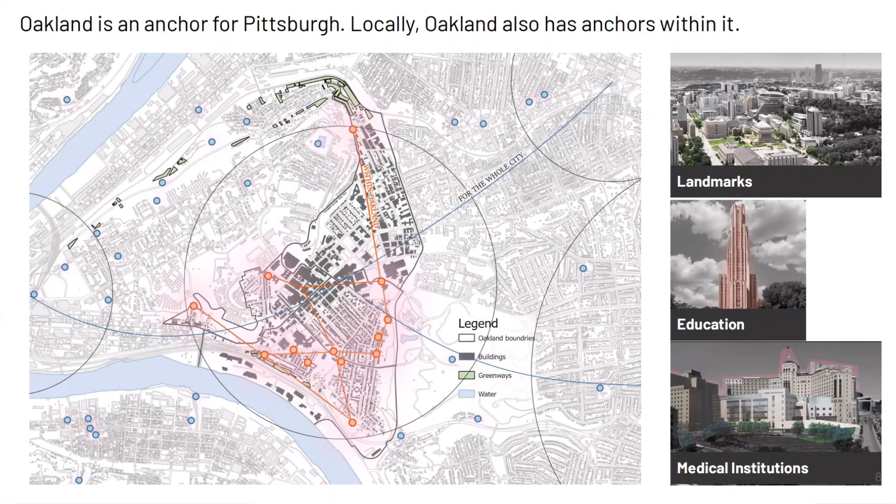Oakland is located at a pivotal point where the street system shifts course. Oakland's major streets follow historic trade routes. Forbes Avenue historically was used by the Delaware and Lenape tribes to travel to and from the East Coast. It was along the same corridor that the first highway was established by the British, which today has become an interstate highway.

Pittsburgh's landscape consists of terraces eroded over millions of years from the ancient Allegheny Plateau. Oakland's geography gave rise to a pattern of land use that is part of its identity. It is a flat plain with a strong geographical boundary formed by steep wooded slopes all around, and a low-lying floodplain along the Monongahela River to the south. While heavy industry and railroad lines dominated Oakland's floodplain, worker housing, churches, schools, and businesses occupied the terraces above.

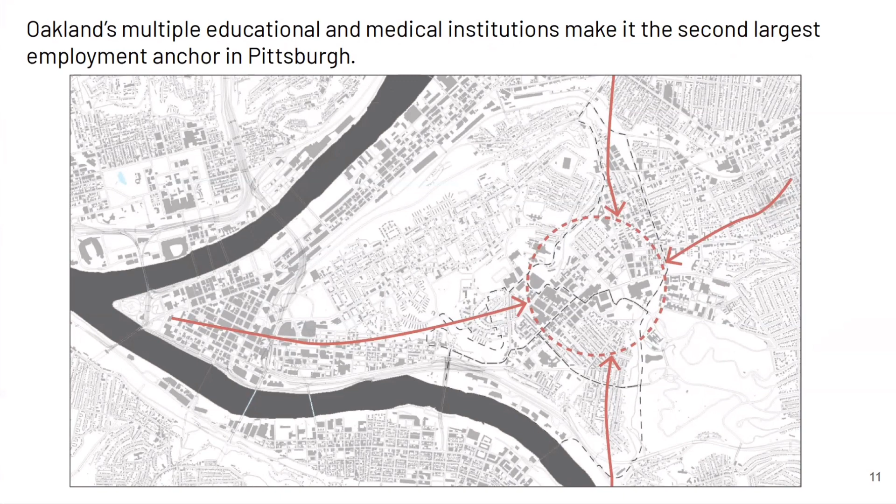With 350 businesses, over 23,000 employees, and a 3:1 employee-to-resident ratio, Oakland is the second largest employment anchor in the city. Oakland's entertainment venues and cultural events draw people from within and outside the neighborhood.

Using Kevin Lynch's mapping technique, Oakland's landmarks, nodes, paths, edges and districts are identified and located in the neighborhood's spatial structure. Oakland's spatial map shows how the 5th and Forbes corridor divides the largely residential area to the south from the denser institutional and commercial zone to the north. Arterial streets, shifting block grids, institutional zones, and slopes all divide Oakland into distinctly different districts.

What makes Oakland diverse? Compared to most neighborhoods, Oakland has a great mix of land uses, housing types, and building sizes.

Longtime residents of Oakland have different interests than institutional administrators or business owners. For these reasons, Oakland is a contested neighborhood. Institutional expansion, large-scale high-density residential projects, and the impact of cars and parking all lead to challenging planning issues.

A study of Oakland's urban grain reveals a clear distinction between the residential and institutional fabric. North Oakland and Central and South Oakland are the major residential areas, though very different in their building fabric. They are split by the commercial corridor and institutional campuses.

Central and South Oakland have a small-scale pattern of streets and blocks, contrasting with the heavily trafficked city arteries, the 5th Forbes corridor and the Boulevard of the Allies. Large-scale institutional development has transformed the finer-grained pedestrian-scaled street grid into large blocks of parking garages and concrete walls.

Serviced once by an extensive streetcar system, Oakland today is accessed primarily by cars. The public bus system is limited to major through streets, and walkability studies reveal a lack of last-mile connectivity in the neighborhood's residential areas.

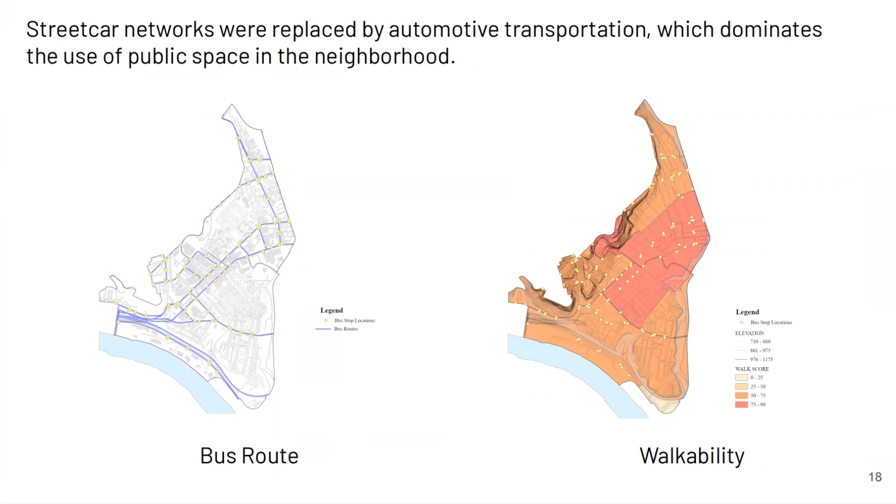Oakland is a complex neighborhood. The boundaries of North, Central, South, and West Oakland, although commonly used, are not as well defined as they initially appear. They are confused by different city council districts, census tracts, business and community organizations, and historical patterns of settlement. This porosity may mean that the community service hubs might be more than local service centers, particularly if they can be networked into a larger system.

Oakland as a neighborhood reinvented itself over time. In each era of Oakland's history, new economic drivers and accompanying waves of immigration have reinvented its socio-cultural fabric and urban infrastructure.

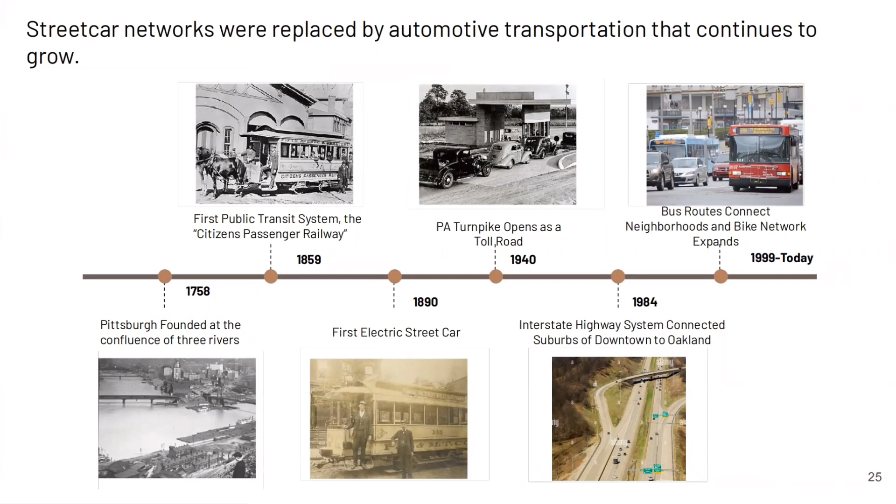The City Beautiful movement that swept across North America in the early 20th century as a reaction to the damages of industrialism was envisioned to reinvent Oakland's public realm into a grand monumental landscape. At this time, the University of Pittsburgh was redefining itself on a 43-acre consolidated campus in Oakland. While the steel industry was declining, the university and hospitals became Oakland's major employers. Today, the neighborhood hosts many spin-off organizations stemming from these institutions.

What does this story tell us about Oakland? Assessing the neighborhood's strengths, we see that it is an economic hub for employment. Its service economy is dominated by its eds and meds institutions, which, like any monoculture, lacks long-term resilience. The neighborhood needs to diversify its economy through bottom-up transformation. The low rate of owner occupancy, which has been falling further in recent years, means there is a weaker base of long-term residents. Continued privatization of public space by large institutions reduces the vitality of the neighborhood's public realm.

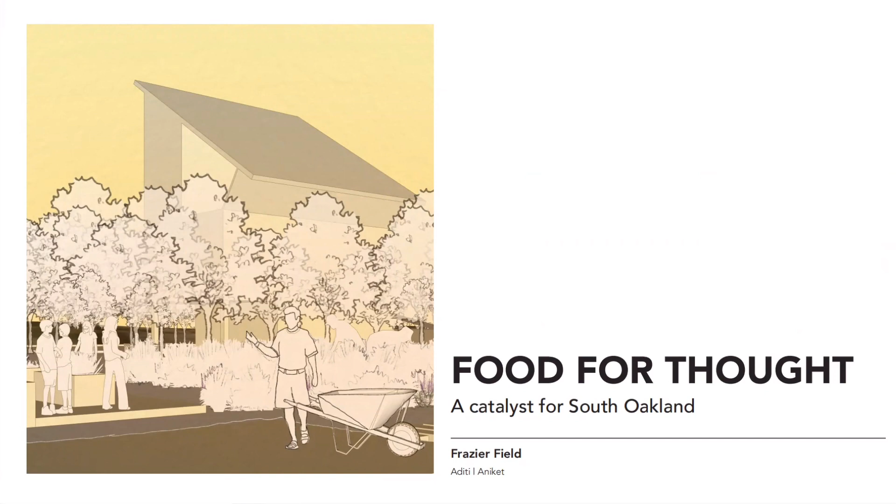Yash and Kaushik have transformed the Herron Hill Pumping Station in North Oakland into a community service hub that is the nucleus of a network of large public spaces. It celebrates Pittsburgh's water infrastructure and history and transforms underused land into economic and cultural opportunities for an increasingly diverse population.

Seyang and Shreya have created Zulema Place, a new center for the Zulema Park District that envisions a mixed-use development around the park with a community service hub that facilitates employment and entrepreneurship.

Rutuja and Yihan propose a multi-site community service hub in central Oakland, expanding the functions of OPDC to advance formal and informal learning in the neighborhood.

Xinyue and Fangyu offer a redevelopment of the Gulf Research Building site along the Boulevard of the Allies as a community service hub with a new mixed-use building centered around a courtyard. The hub will serve as a catalyst for development as well as stimulate investment and improve resilience in the community.

The community service hub at West Oakland at the corner, already a center for food in the neighborhood, is intended to become a part of the neighborhood-wide resource sharing network.

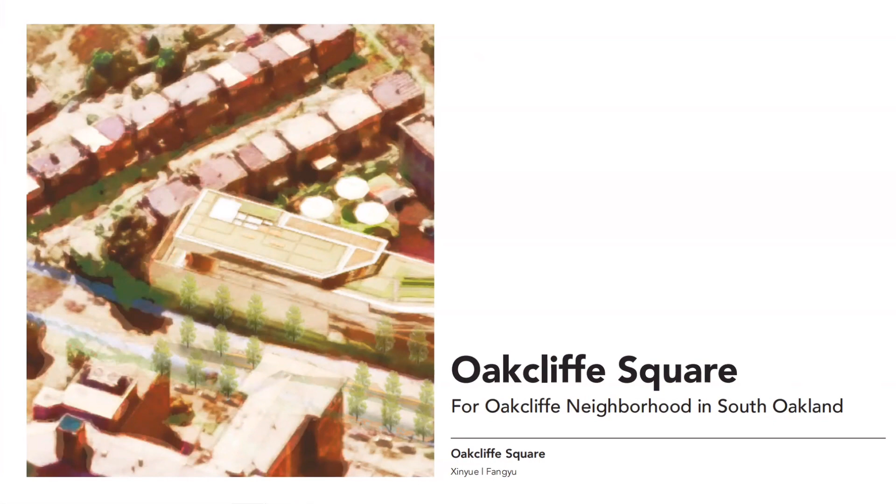On behalf of our team, Aniket and myself will be presenting our proposal for a community service hub at Frazier Field. Food for thought, a catalyst for South Oakland.

Frazier Field, also known as Dan Marino Field, named after the South Oakland resident who became a renowned NFL football quarterback, is the only large open space in the neighborhood. Located along Frazier Street at the southern edge of the neighborhood, it is bounded on other sides by the steep hillside slopes of Panther Hollow and the Monongahela River.

Frazier Field currently hosts a front office field house, baseball court, basketball court, and kids' play area. The courts and play area bring in children after school hours, as well as college students. South Oakland Neighborhood Group, or SONG, hosts their weekly meetings at the field house.

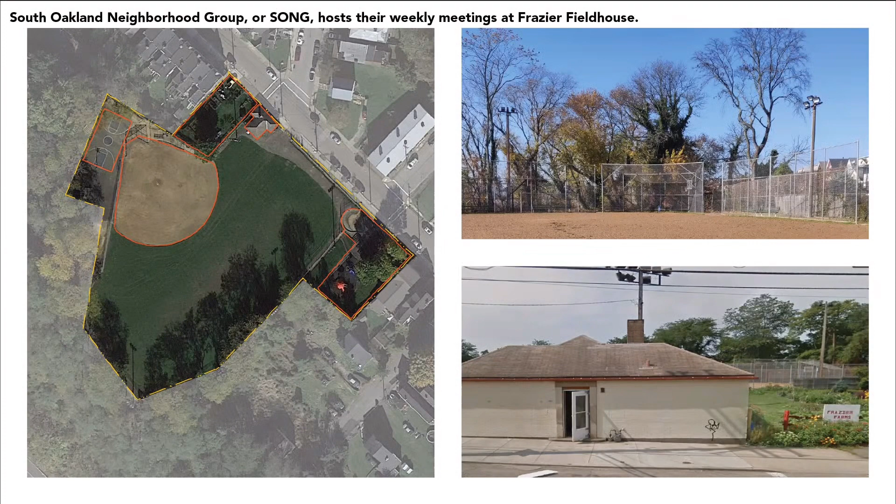We assessed South Oakland's current strengths, weaknesses, opportunities, and threats. The strengths are: the neighborhood has a dense residential fabric with unique affordable housing, on-street parking, and one-way managed traffic. Historically home to mill workers, it continues to host immigrant families and their communities. There is the availability of large open space such as Frazier Field in the neighborhood, along with access to Schenley Park within walking distance. The forested hillside wrapping around the southern edge and a few parklets in the neighborhood add to its appeal.

There are community serving organizations operating in the neighborhood such as SONG, OPDC, Oakcliffe, and CSHs. The Boulevard of Allies divides South Oakland from the rest of the Oakland, but it also protects the neighborhood from Oakland's more developed areas, making it more private.

The weaknesses are: 77% of the existing real estate is absentee owned. Only 23% of the neighborhood properties are owner occupied, compared to the city average of 46.7%. There is a lack of last mile connectivity to access the public transportation system on the Boulevard of Allies, where only 3 buses—58, 65, and 93—run, and at a sparse frequency of 45 to 60 minutes.

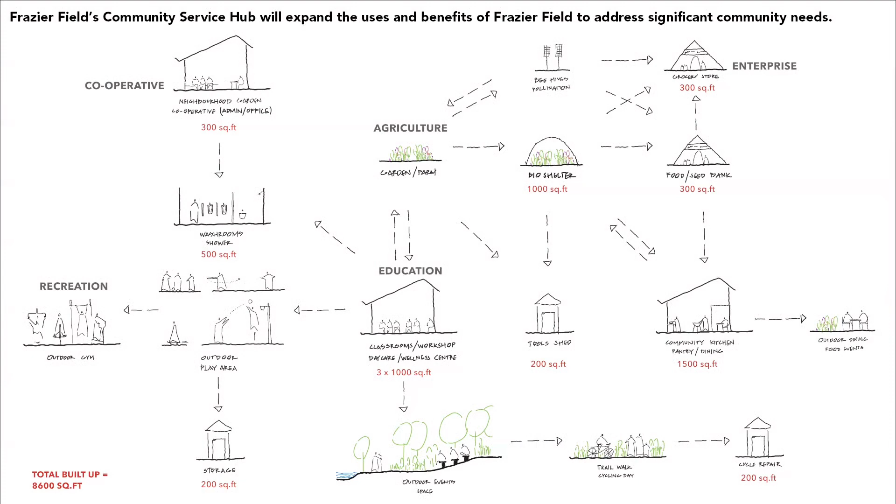The operational model for this community service hub charts out the sources for raw material, funding, labor, and income through local and global partnerships. The key, we believe, is to build on South Oakland Neighborhood Group's existing board as an umbrella organization that encourages and manages 3 kinds of neighborhood cooperatives under its leadership: South Oakland Neighborhood Food Cooperative, South Oakland Neighborhood Housing Cooperative, and the South Oakland Neighborhood Mutual Aid Cooperative.

These cooperatives will allow the community to build collective wealth, knowledge, and resources, and ensure investments remain local within the neighborhood. It will build voice, advocacy, and aid co-action during adverse conditions.

As part of our proposals for the Community Service Hub, we have envisioned a 20-year model of change and visualized that phase-wise projection in 2, 5, 10, and 20 years from now through a monthly newsletter publication, Sing Along with Song. In this stage, we see the residents of South Oakland coming together through multiple events hosted at Frazier Field by the Song Group, such as basketball tournaments, pet meets, book clubs, and movie screenings.

These events lay an impetus for discussions on the needs of the neighborhood and mobilize co-action to begin talks with the city, universities, and organizations on these goals in a 2-year period.

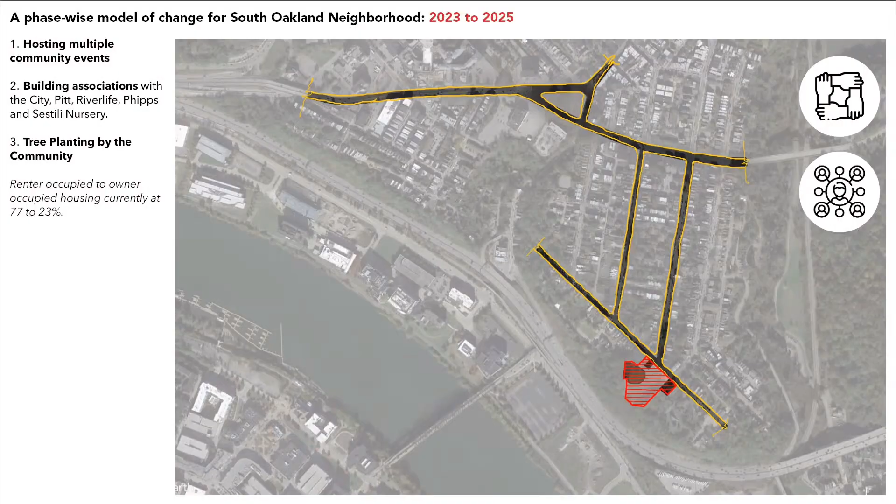In the next phase, we see that the community has grown closer. Residents and students engage actively in the neighborhood's pursuits. The existing Song Board brings on new members in alignment with the neighborhood goals and leads the way. Quality of the neighborhood's public realm is enhanced, beginning with reconstruction of the Boulevard of the Allies and neighborhood streets. Last mile connectivity is addressed with the city, bringing in shared mobility.

In the second phase between 2025 and 2028, the Song Board brings on new members into a third of its team to help start cooperatives. The South Oakland Neighborhood Housing Cooperative is formulated as a subsidiary of Song. Negotiations begin in the neighborhood with 250 absentee owners to acquire housing.

Hillside slope remediation begins with multiple rounds of manual de-weeding and native seed dispersal with the city and community volunteers. Formation of a public pathway at the hillside edge begins. Boulevard of the Allies is reconstructed. Designated parking is introduced to South Oakland streets. The city also brings in shared mobility with a neighborhood shuttle running on a Dawson Ward loop and cycle sharing stands with POGOH. Crowdsourced funding to set up Frazier Farm begins.

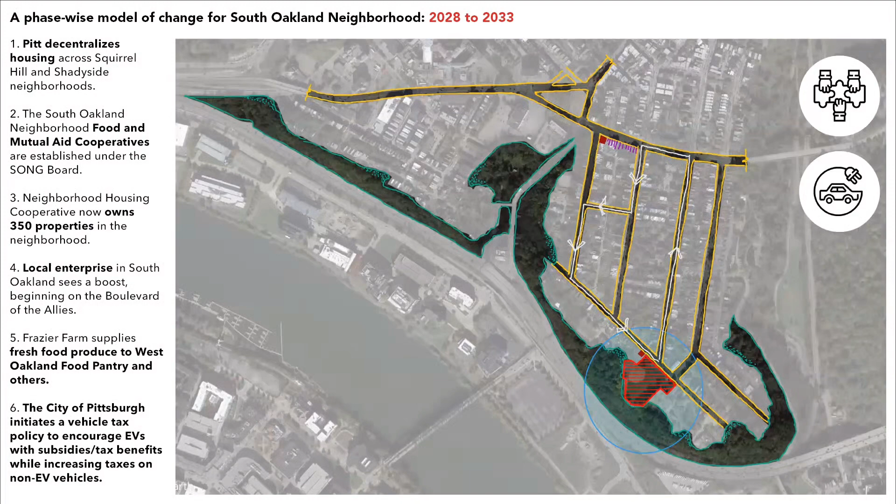Charging stations introduced to South Oakland streets. The city of Pittsburgh initiates a vehicle tax policy at this stage to encourage EVs with subsidies and tax benefits, while increasing taxes on non-EV vehicles.

In the final stage, we see South Oakland as a thriving neighborhood with a strong sense of community and local economy through its 3 cooperatives. The public realm has drastically improved with more pedestrian and environment-friendly interventions.

In the final phase, between 2033 and 2043, food production at Frazier Field is maximized. A completed hillside pedestrian trail gets connected with the river Esplanade through the Bates Steps and is integrated with parks and parklets. Mobility in the neighborhood encourages an increase in the number of non-car commuters, with residents adopting walking, cycling, and taking the bus or the shuttle.

Neighborhood cooperatives continue to grow and acquire more housing, strengthen community food networks, and mutual responsibility. Through cooperative building over the years, home ownership is made accessible and affordable to those in need, and a higher than average ownership occupancy can be seen at this stage. Rented occupied to owner occupied housing is at 35 to 65%, which is remarkable relative to the city.

For our proposal of the Boulevard of the Allies, the right-of-way is reorganized to accommodate a wide green median in between left turn lanes, introduce a curb landscape, and further a raised unidirectional cycle track and footpath on both sides, separated by flexible bollards. In due course of time, shade from the tree canopies will cover its entire length.

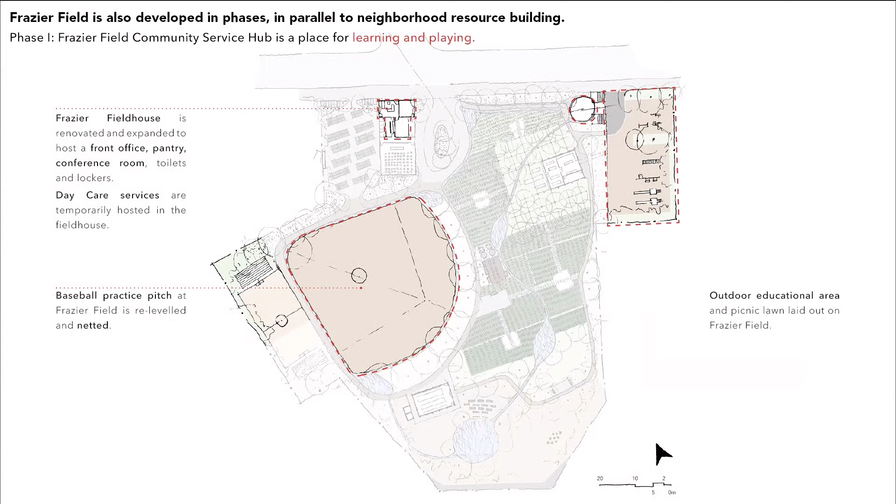In the next 3 years, kids' play area is relocated so that play and gym equipment for adults can be introduced. Basketball court is relocated and doubles up as a futsal court with seating on 2 sides. Bioremediation of soil patch-wise begins. Independent raised beds are developed. Composting begins on site.

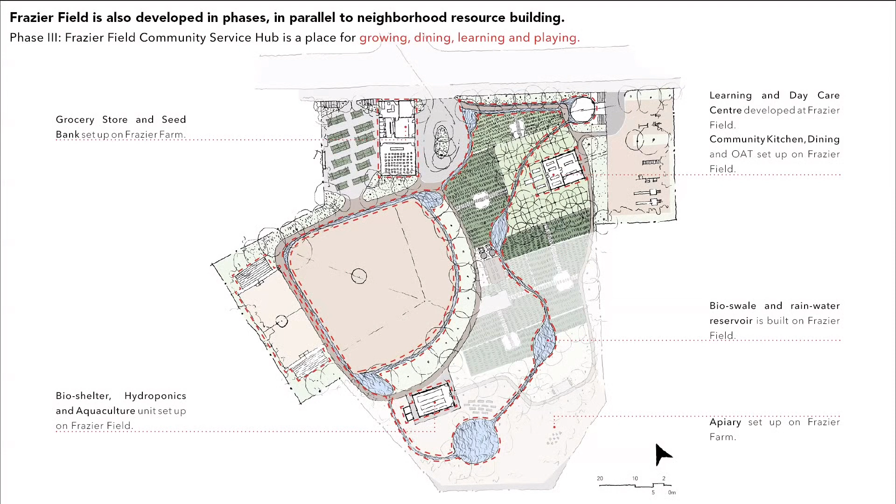In the next 5 years, bioswale and rainwater reservoir is built. Learning and daycare center developed along with community kitchen, dining, and open-air theater. Bioshelter, hydroponics, and aquaculture are set up alongside a grocery store, seed bank, and apiary.

In 20 years, Frazier Field Community Service Hub is fully operational in the service area and beyond.

The design proposal for the site accommodates all of the productive farmland, bioshelter, and buildings with solar roofs oriented along the north-south direction. A bioswale and a series of small rainwater harvesting ponds run along the site contours down to culminate at the hillside edge in a reservoir.

The expanded field house gives way to the baseball practice pitch with the futsal basketball courts at the back. An area next to the field house hosts raised beds rented by the community residents. A vehicular entrance is provided for loading and unloading of goods.

The learning center sits in a clearing of the fruit orchard with a partially outdoor dining, kids' play area, and adult outdoor gym on the site. Platforms to pause and store goods or equipment temporarily in the farm meet at a central demonstration deck and composting unit. The apiary sits in a secluded area to protectively raise queen bees.

A picnic area, open-air theatre, and a peripheral walking pathway create a pedestrian trail connected to the hillside slope.

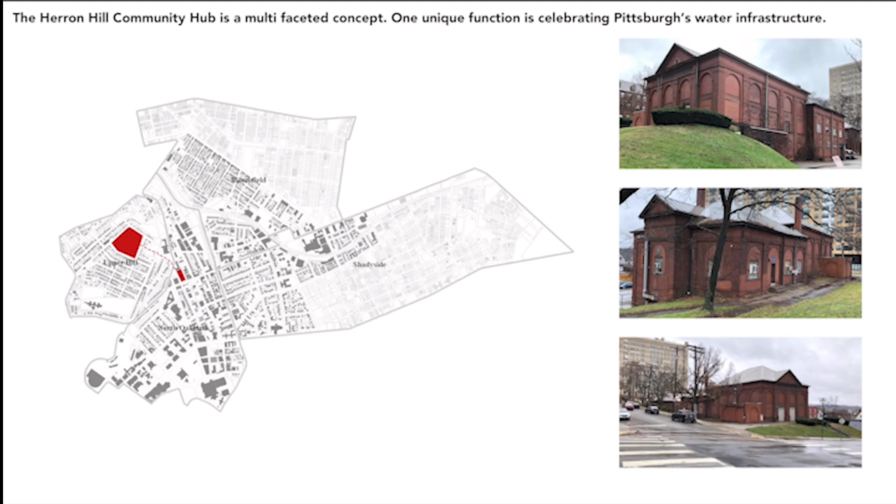The buildings on site include the main pumping station, which is still functional, and the defunct laboratory at the rear. The pumping station supplies clean water to Oakland and the neighborhoods around it. The pumping station building, built in 1896, was a technological step forward involving innovative water analysis.

Herron Hill was constructed in the late 1800s and was designed by a prominent architect, William Frazier, in the classical revival style, which incorporates Greek and Roman elements.

Both buildings have stood at the original location since their construction and continue to play a key role in the water distribution system of Pittsburgh.

The laboratory, although defunct, was crucial in advancing water and paving analysis for the city in the last 60 years. The station mainly pumped water to higher elevations such as the Hill District and Squirrel Hill.

Currently, the site is extremely contoured, underused and ignored, covered with overgrowth and almost unseen. Although it was made viable for historical landmark status, very few residents of Oakland and even fewer of Pittsburgh know about the buildings.

Due to the covering up of windows of the building and the abandonment of the lab, the site remains underused, with only the PWSA and maintenance staff visiting it from time to time.

The northern rear portion of the site is covered with overgrowth and remains a dormant space with the potential for change. Large tree canopies in this area serve as a backdrop to the structures as well.

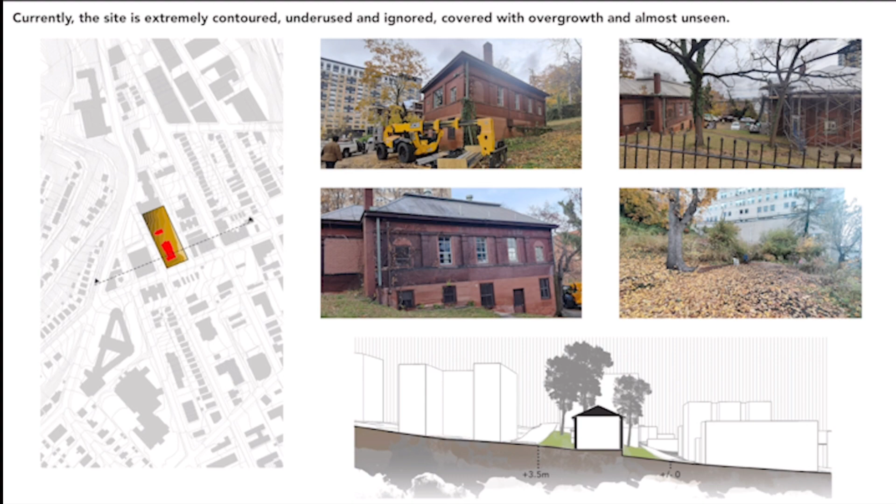Historically, the location is also significant because of the opportunity to connect neighborhoods separated by topography and demographics. Northern Oakland and Upper Hill, towards the northwest, have been segregated by geography and class throughout the last century, and the impact of segregation exists today.

Although separated through geography and administrative boundaries, this historical infrastructure network has connected neighborhoods around it by supplying water for decades. This could potentially be an asset in connecting these neighborhoods for the future.

North Oakland has boundaries with prominent neighborhoods and houses important landmarks. Zooming out slightly, we see that North Oakland shares distinct boundaries with the Hill District, Bloomfield, and Shadyside in different ways. The steep terrain serves as an edge between the Hill District and North Oakland.

Infrastructure, namely the railway line on the northeast and Neville Street on the east, act as boundaries between Bloomfield and Shadyside with the neighborhood respectively. This characteristic is unique to North Oakland compared to the rest of Oakland, allowing for a more transient and kinetic nature to the neighborhood.

This lynch map provides a snapshot of our interpretation of the neighborhood in terms of its elements. Centre Avenue is the spine that binds the neighborhoods together.

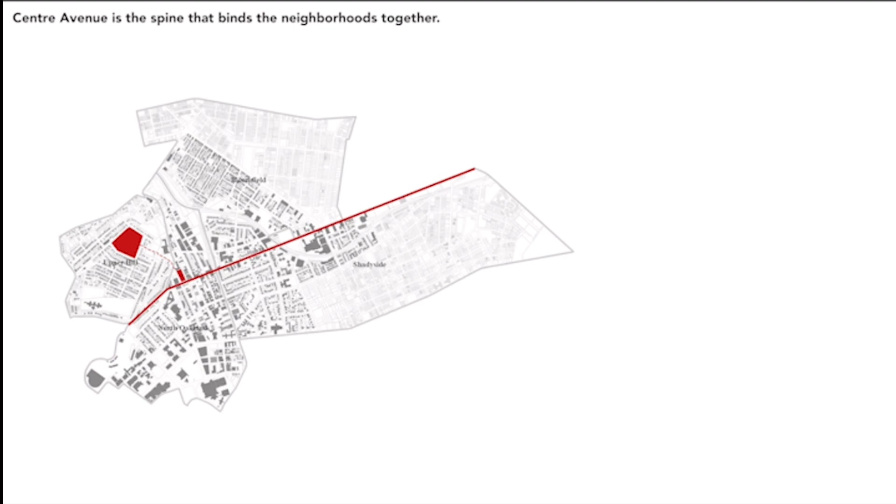The site is accessed through the east-west corridor of Centre Avenue, which allows for great connectivity from the surrounding neighborhoods. This also has active public transit connecting it to other areas of Pittsburgh.

North Oakland has a sufficient population for the proposal of a CSH, but due to its extended shape, the walkability to the site is possible from adjacent neighborhoods.

North Oakland is a dense neighborhood in terms of demographics compared to the ones around it, and has a total population of just under 10,000 as per the US Census.

This data, combined with the population statistics of the surrounding neighborhoods, justified the location in terms of a 0.5-mile walkshed for a community service hub.

The density of population is mainly due to the presence of institutions and proximity to downtown.

North Oakland has a high percentage of experienced citizens. The same area also has a high percentage of citizens over the age of 60.

We learned from our interview with resident Kathleen Gallagher that many of the high-rise buildings have residents who have returned to North Oakland after decades. The percentages clearly indicate the difference compared to the rest of Pittsburgh.

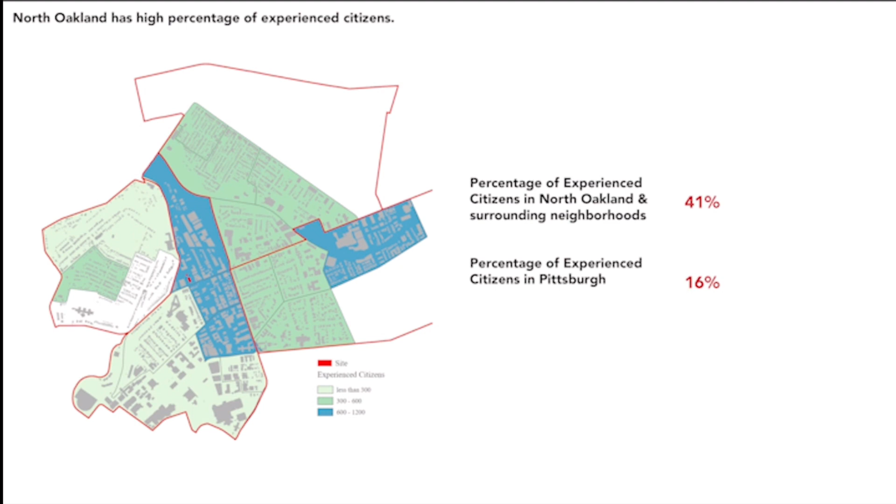During our first walk through the site and neighborhood, we found several recurring patterns throughout and noticed a few key missing elements. This formed an important base for our study and design logic.

We then had to analyze available data to support these observations. North Oakland mainly comprises high-rise buildings without balconies.

When we furthered our analysis of building data, we found that more than half of the buildings in North Oakland were above 60 feet and without any private balcony or open spaces.

This again showed us how necessary an open accessible space is for the neighborhood. The neighborhood has heterogeneous urban grain but lacks accessible public green space.

Many of the high rises in the neighborhood, combined with the older residential units and institutional buildings, lend themselves to a varied urban grain. Although the map on the left shows plenty of open space, most of these voids are parking lots or unused spaces.

With the demographic density that exists in the neighborhood, there is a lack of accessible open and green space for the community. North Oakland is a densely developed area that can support a community service hub and provide the amenities

the neighborhood lacks. The site for the community hub is owned by the city and hence would be a strength to the intervention. The site is also highly visible and has historical relevance. However, there is high-speed traffic around the site which reduces pedestrian access.

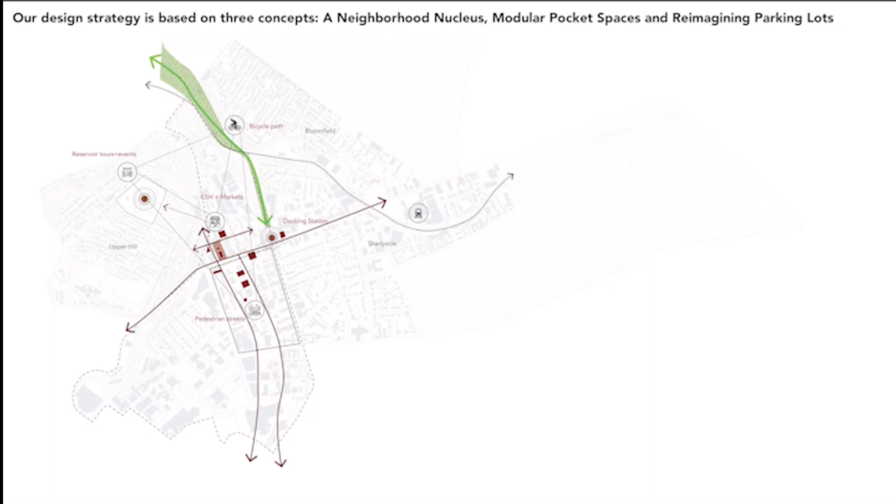Based on this strategy, we've looked at a few precedents around the world for our inspiration. These precedents and analysis lend themselves to a vibrant program.

The Museum of Water Infrastructure would situate and locate the site on the map. The lab would also house a community meeting and dining space, which would give the neighborhood a much needed accessible space for the exchange of ideas and thoughts for the future of the neighborhood.

The admin headquarters for the space would be housed in the main building. This would also house office spaces for the PWSA and DPW.

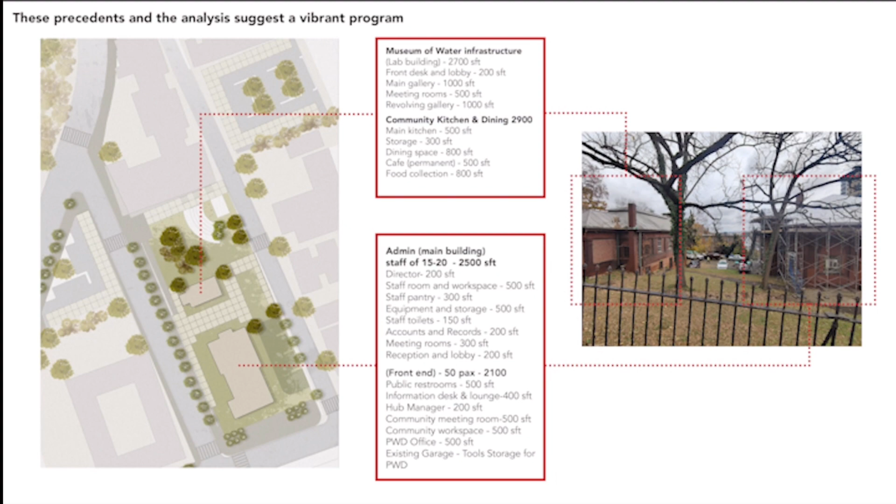The rear of the site houses a large public space consisting of an amphitheater, a children's play area, and modular spaces made up of scaffolding. These scaffolding structures would allow for a variety of functions such as community gardens, local markets, and activity zones.

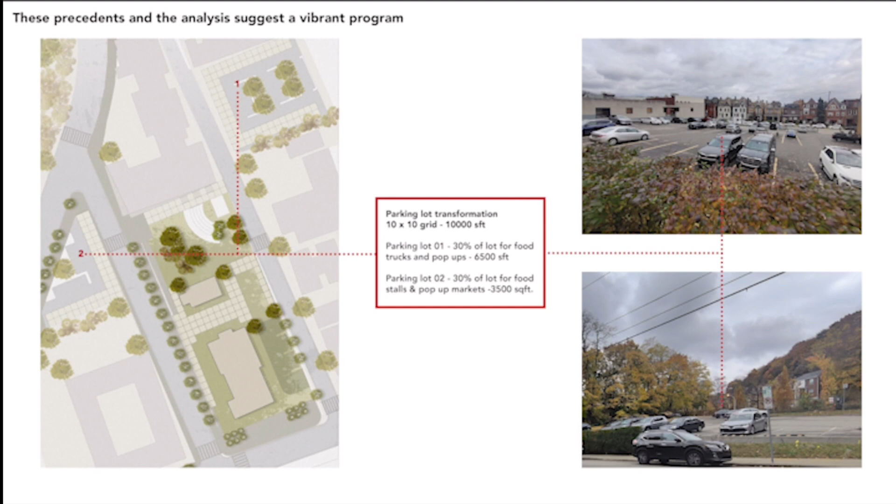The parking lots on either side of the site would be transformed into community spaces over the phases. The scaffolding would be placed on the parking lots while retaining the parking, and the modular spaces would house a variety of functions. The proposal aims to take shape over the course of 20 years with phase-wise interventions.

During the first phase, the lab building is redeveloped and reused as a museum and community meeting room. The main building is revamped on the inside to create office spaces for the PWSA, DPW, and the admin of the community hub. After 5 years, scaffolding is purchased to create these community spaces at the rear of the site

and the parking lots on either side. These flexible spaces could be used as markets, allotment gardens for the residents, activity spaces for experienced citizens, and smaller spaces for exhibitions. Safe and slower pedestrian crossings are created along Centre Avenue for improving access to the site.

After 15 years, air rights of the parking lots towards the south of the site are purchased and these spaces are occupied to create multi-use community zones.

Another important intervention in this phase is the development of the connection between the main site and the reservoir in the Hill District. This would be done by revitalizing the existing set of steps which connect Bigelow Boulevard to the terraces on top of the Hill District.

After 20 years, these parking lots are converted into community zones with smaller permanent functions such as libraries and fitness zones to create a vibrant network in North Oakland. Centre Avenue is made more pedestrian friendly to create access to the green corridor at Neville Street.

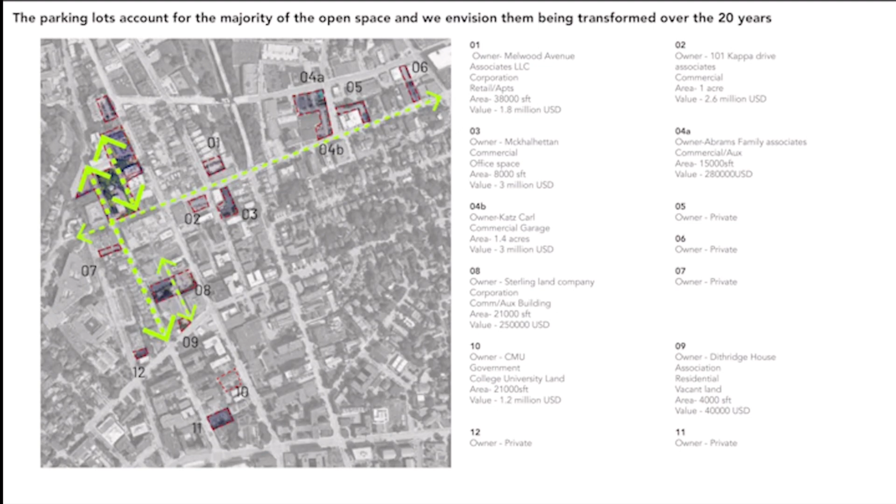These spaces would be experimental during the initial phases, with the occupants and community developing the space towards a more permanent structure. Scaffolding would allow flexibility and modularity of space and function as the backdrop to the main building. The temporal nature of the scaffolding means it would be lightweight, easy to transport, and could be used for multiple functions such as exhibition spaces, local markets, community gardens, performance spaces, and fitness zones.

On a larger scale as seen in this diagram, the scaffolding would stitch the fabric of North Oakland together without disturbing the existing function of parking initially. While we do wish for a more pedestrianized network, we recognize that this cannot happen immediately. We envision the framework to work in tandem with the parking lots to make them more vibrant and multi-use.

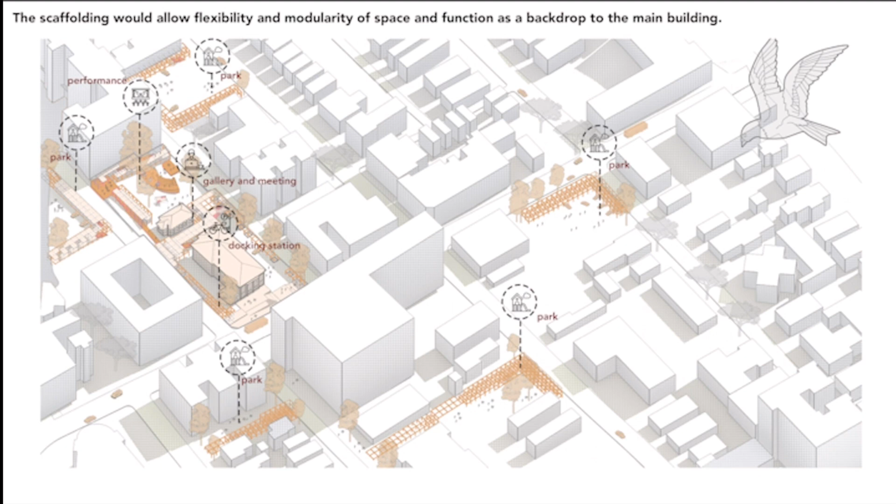During the last phase, with the success of these modules, we envision the conversion of these temporary spaces into permanent structures based on community feedback. Bridging the fabric together through this framework would form a multi-use community network throughout North Oakland. The modularity of these spaces allows for a multitude of functions and forms an inclusive built system.

We believe the idea of relocalization can occur by providing the community with an equitable, accessible system which can change as per necessity. We envision grocery stores, cafes, activity zones, and exhibition stalls coming up as needed. By allowing for a shared or ownership model, these pods could be rented out or even leased out for longer periods of time.

The parking lots would be transformed as multi-use spaces and contribute to the enhancement of the community. These parking lots are reimagined as canvases which allow for the loose fit model to take shape, with a variety of functions coming in as per need.

By retaining the parking, we look at this as an experiment which allows the community to learn through space utilization and flexibility without disturbing the current purpose. Over the timeline of 20 years, we hope that this system helps bridge various other disconnected blocks together and provide for local businesses to flourish.

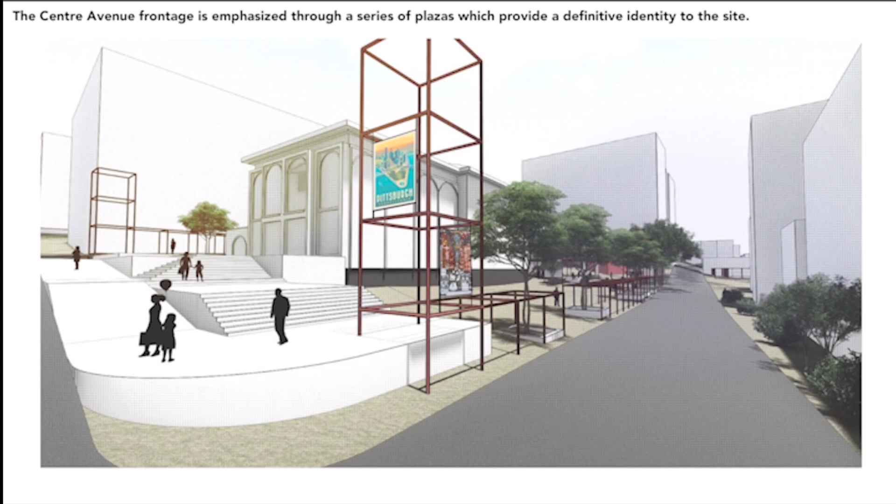We envision the creation of a community hub that combines infrastructure, history, and economic opportunities for the bottom-up production of culture in North Oakland. By connecting North Oakland to its surrounding neighborhoods, it would create a larger network of accessible public spaces. The pumping station would also be rejuvenated with a new identity, and this could serve as a template for other reuse projects in the neighborhood and even in Pittsburgh.

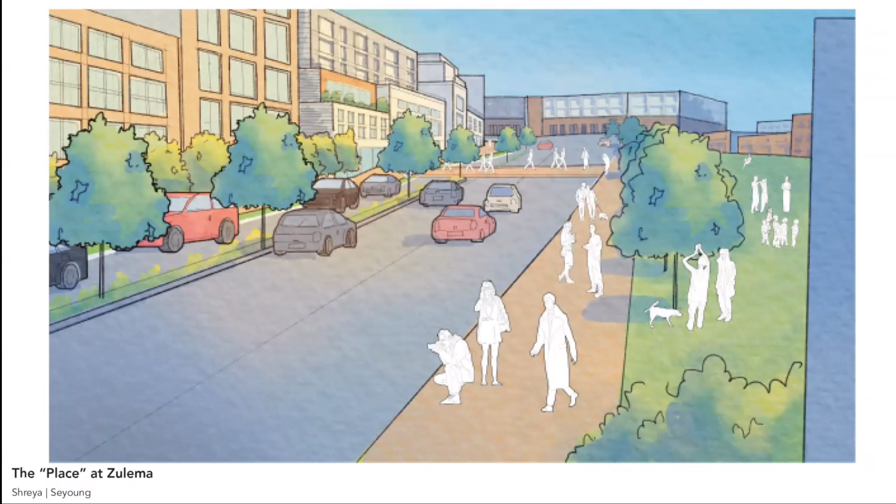Hello, this project is The Place at Zulema by Shreya and Seyoung. The Place at Zulema takes Zulema Park and its surrounding areas, the Zulema District, as a multifunctional community center for local economic growth and community engagement. The project will suggest a new community service hub and following commercial, business, and residential district over a 20-year period.

Located on the boundary of South and Central Oakland, the site sits at the heart of both neighborhoods and is an important crossroad for Oakland.

While the area of South Oakland and Central Oakland is expansive, the immediate service area for the community service hub is bounded and already defined by the various geographic and commercial features. For example, UPMC bounds the west, Schenley on the east, Highway on the south, and the Pitt campus on the north. This boundary helps to focus the study area and gives plausible goals for the project.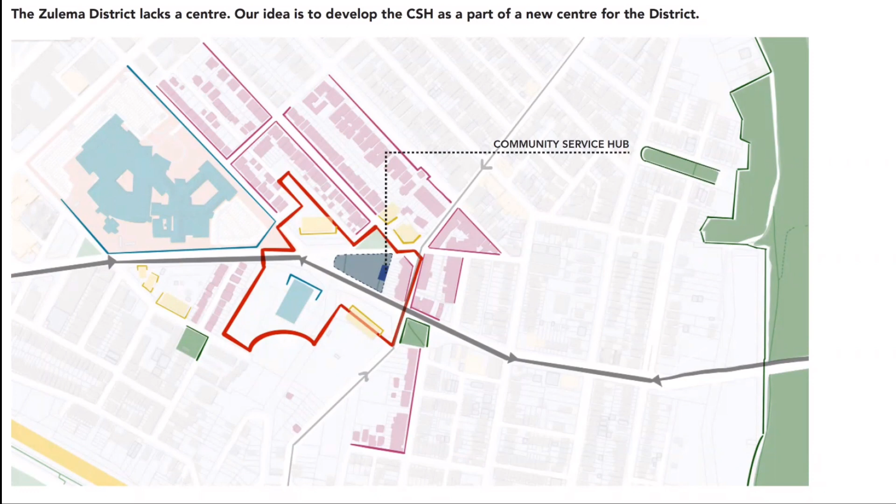Zooming into the immediate site, centered out Zulema Park, where we will be placing the new community service hub, it is largely surrounded by residential fabric and a few UPMC buildings. Although South and Central Oakland are prominent neighborhoods, the population surrounding Zulema District lacks a service that provides for not only the essential everyday needs, but also entertainment and work.

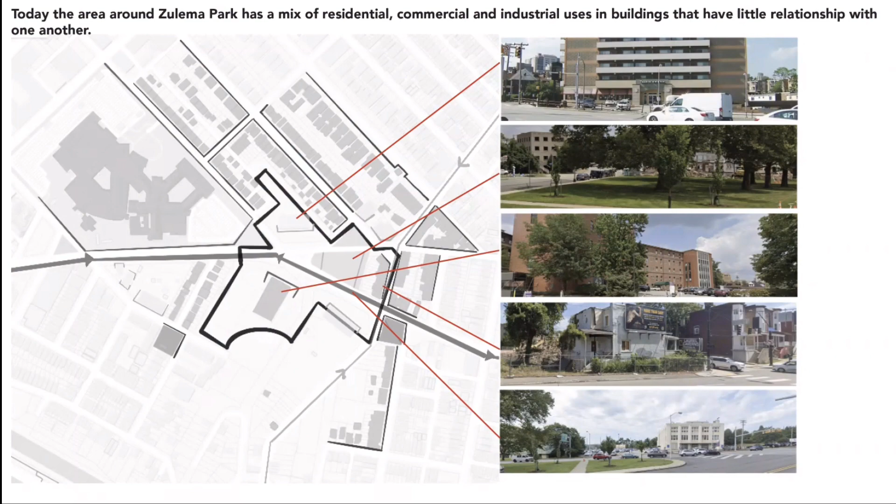Although the site has various weaknesses and threats, such as its heavy dependency of vehicles and the lack of diverse functions, it also holds great potential as the tightly knitted residential fabric, proximity to large institutions, and strategic location is adapted to support financial and time-extensive changes.

From the carefully analyzed strengths, weaknesses, opportunities, and threats of the Zulema district, we began to extract some of the most important factors that prompt questions and problems that are essential to tackle in order to achieve our goal of creating multifunctional space for a more vital, diverse, and holistic community.

Some of these curated elements include the central location, large residential population, lack of ownership and community, proximity to Forbes and Fifth Commercial Corridor, strong presence of major institutions, and its location on the junction of Bates and Boulevard.

These characteristics of the site was then translated into problems, which includes it being in the service area void, large transient population, and the lack of economically circular loop. Additional problems include the lack of stability and resilience, the lack of access by foot or public transportation.

So then the next step of creating this process thread was to align the problems with specific goals for the site. An example of a thread would be, because the site holds a large student residential population, the majority of the population is transient, therefore lacks local residential ownership, and the essential goals are then to retain the population by providing economic and business opportunities.

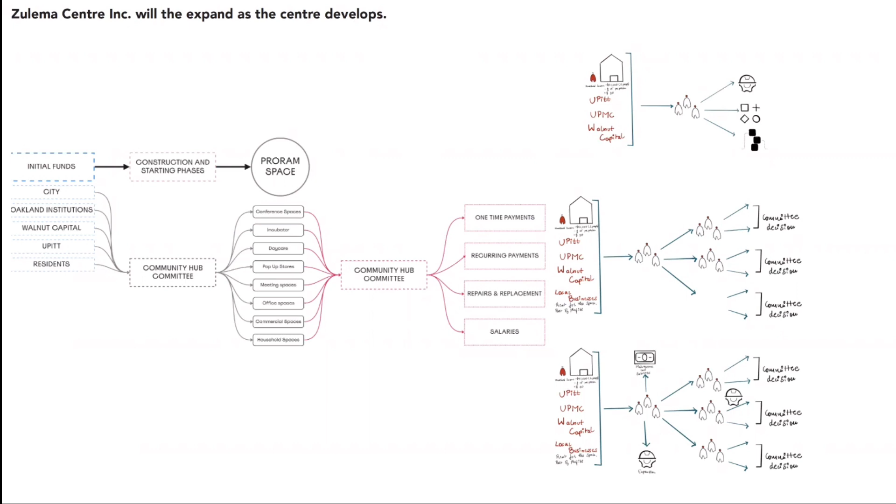From there, moving into our design phase, we listed down a few project goals we felt were essential, breaking them into 3 categories: building, road treatment, and transit.

In the building category, our aim was to create an active street wall for the site, which includes many functions that will attract all groups of people to the site and activate the entire district while allowing economic development as well.

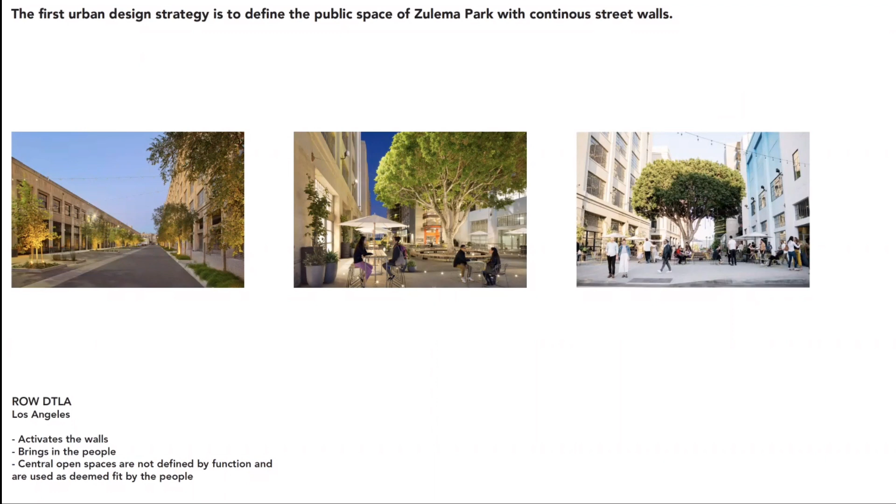For our form, having decided to create active street walls and allow them to activate the space as well, we looked into the precedent to understand how it could be done. We looked into the Row DTLA project. It taught us the value of spaces like restaurants, cafes, outdoor seating spaces, and unprogrammed spaces in the middle. It showed us how people occupy free, open central spaces as they deem fit.

For the road treatment, we focused on making the boulevard safer for pedestrians. We aimed to provide a median and add tree cover along all of it to make the boulevard truly a boulevard. For Zulema Street, our goal is to make it pedestrian only and reroute the traffic to Coltart Avenue.

For the transit, we aim to add bike lanes to the boulevard that will help connect it with more modes of transportation, while also tapping into the transit system that will connect other community service hubs across Oakland.

Taking all of this into consideration, we moved into the actual design phase of our project. We broke down our project into 4 phases to ensure that each new program change is accepted and running successfully well enough to financially support the following phases.

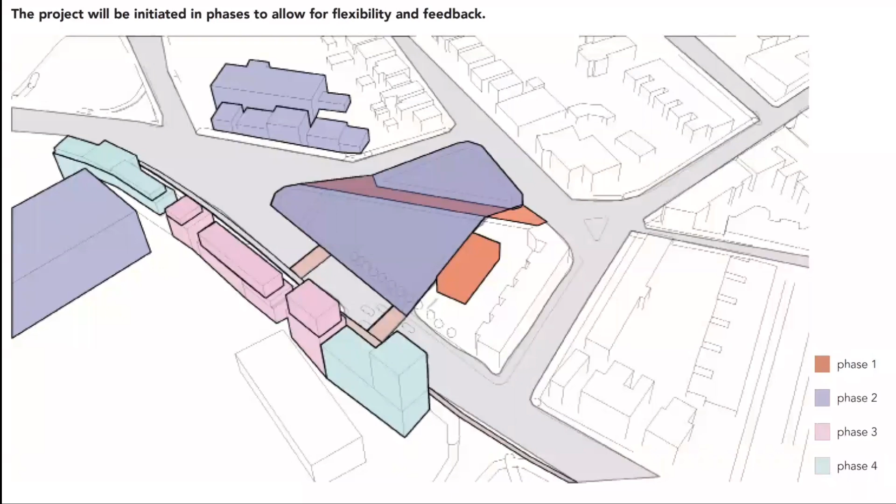Phase 1 will be 0 to 2 years, Phase 2, 2 to 5, Phase 3, 5 to 10, and Phase 4, 10 to 20 years.

In Phase 1, the very beginning of the project, it will be funded by the City of Pittsburgh, local institutions, citizens, and OPDC, in order to primarily tackle building this community service hub, closing down Zulema Street to be used as a public event space, and substituting the car lane on the Boulevard of the Allies for a bike lane.

Here you can see that the community service hub is becoming a public face at the east end of Zulema Park, while also serving as a shared office space, childcare center, as well as an incubator for new and existing businesses.

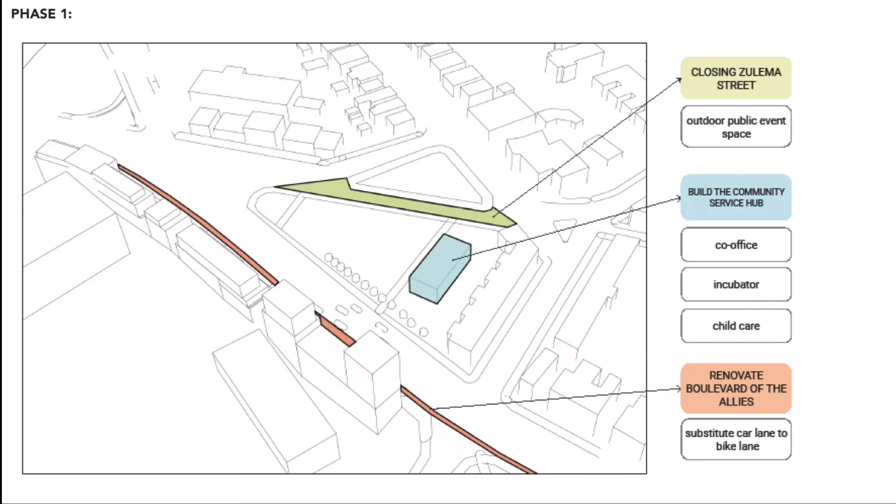Ideally, these three functional changes in Phase 1 will increase connectivity and visits to the site through the modified traffic system and retain student population, hopefully integrating them into the existing local community, which will increase community gatherings and interactions. In addition, the entrepreneurial opportunities provided by the Community Service Hub will promote the community's overall economic growth and circularity. Changes in Phase 1 will stimulate and fund the changes in Phase 2.

Phase 2 aims to develop a new commercial and business building structure and a new grocery store located in the Easley's building, in addition to more developments in the Community Service Hub, Zulema Park, and the Boulevard of the Allies. With the help of existing stakeholders, but also larger agents such as tech companies, Giant Eagle, and Walnut Capital, Phase 2 can be possible.

Changes in Phase 2 are not only limited to the physical boundaries of Zulema Park, but start to develop the surrounding district area as well. The key changes in Phase 2 are not only the continuation of achieving goals in Phase 1, but also promoting local business ownership, which can become the starting point of Pittsburgh-based large industries, and both retaining and attracting a stable residential population.

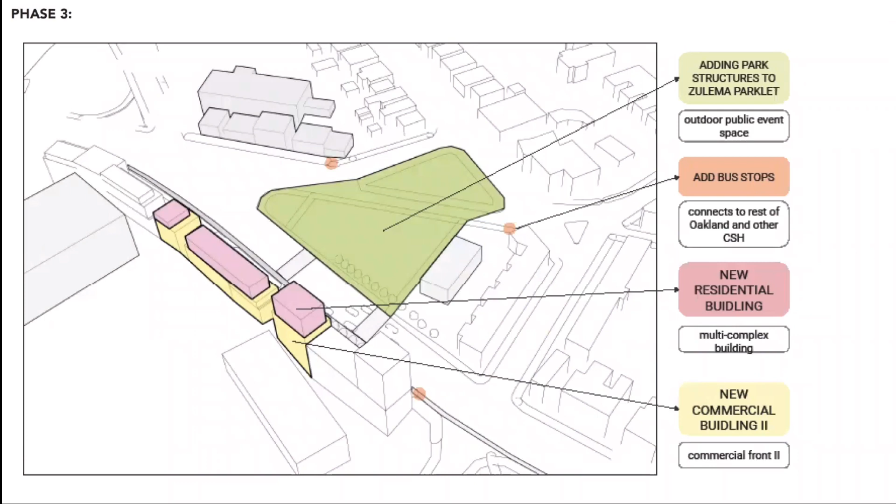Revenue from renting out commercial spaces in Phase 2 will allow larger developmental changes in the following phases. In Phase 3, a new residential and commercial mixed-use building will extend the commercial front and increase housing for the workers of Zulema Center. In addition to the new multi-complex building developments, the addition of bus stops and increased access to public transport is one of the key changes in Phase 3.

Changes in this phase will not only retain the transient population and increase local residential ownership, but will also start to tie in the initial goal of live, work, and play, creating a vital, diverse, and holistic community.

The economic change model of Phase 4 is somewhat similar to Phase 3, in that the space for residential, commercial, and business continues to grow. However, the key difference in Phase 4 is that the Community Service Hub will transform its function. Previously a shared office space and incubator for new businesses, it will become a public library with access to technology to serve the community. This will provide increased resources and access to information and technology, giving back to the community.

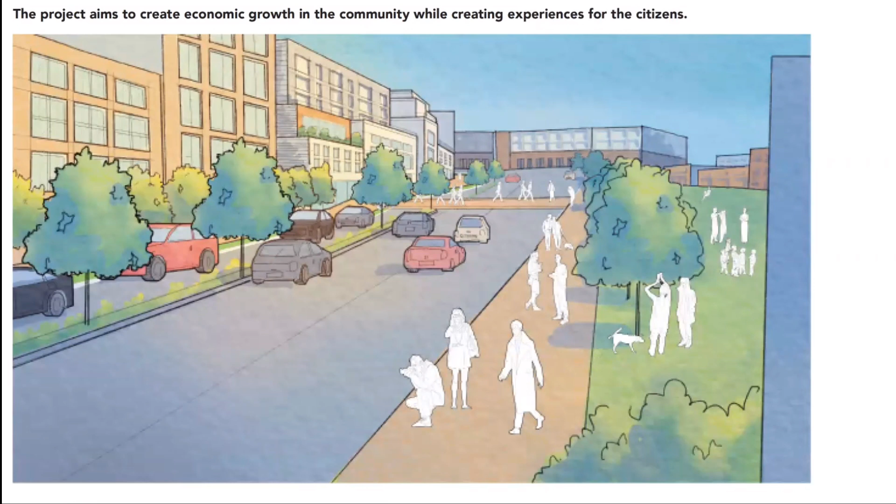Here is a final look of the completed project in 10 years with its various and diverse programs. The place at Zulema provides great transportation access, but also has the ability to hold multiple functions and events, creating unique and memorable experiences for the Oakland community.

Lastly, and most importantly, this proposal recognizes the various unexpected challenges of this time-intensive and financially expensive project. Therefore, the project experiments with hypothetical yet realistic scenarios, exploring both successful and unsuccessful cases and unexpected events with butterfly effects. Preparing for unexpected results and directions minimizes loss and allows for flexibility.

For example, this diagram shows whether or not our community service hub is successful or unsuccessful, the following steps in order to achieve our final goal of a vital, diverse, and holistic community.

That was our project at Zulema Park, and thank you so much.

Hello all, I am Rituja Badwe, and I, along with my partner and cohort mate, Nihan Liu, present to you a proposal for an educational center as a hub in central Oakland.

The neighborhood of central Oakland has a very unique sense of place. It is the meeting place of large institutions like UPMC and University of Pittsburgh on the north side, and the Carnegie Museum of Art to the east. A low but dense residential area lies on the south and west end of the neighborhood. The Forbes and Fifth corridor runs along the north edge of the neighborhood, and it is lined by the vast Schenley Park on the east edge.

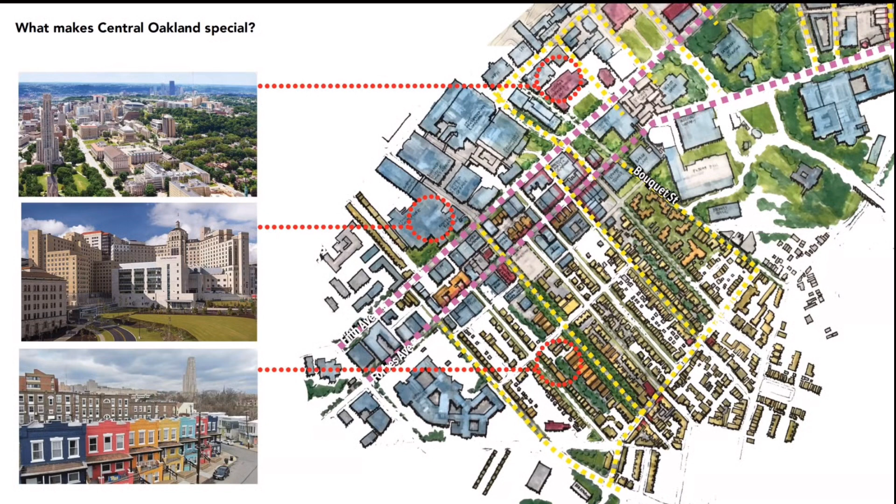A thorough SWOT analysis of central Oakland revealed the following. Its strength was seen as a diverse neighborhood in terms of people and functions. It also hosted a very local business district. It was home to two very important historic districts in the city of Pittsburgh, and its proximity to Forbes and Fifth was a huge plus.

A disproportionate student population and owner population created a lack of discipline. The lack of access to Schenley Park due to the terrain and the underserved local business at Atwood Street in central Oakland were observed as weaknesses.

The diversity of population and functions, and the presence of hillside and a well-connected network of internal roads, was seen as the opportunity in the neighborhood. The constantly decreasing percentage of housing ownership is observed as a threat.

Central Oakland has a remarkably diverse population in terms of age, background, occupation, and languages.

The Oakland 2025 plan suggests introducing a new educational resource into the neighborhood. This proposal considers both programmed activities and physical urban improvements. It is based on the concept of a community service hub that was presented in the Department of City Planning's Oakland Plan.

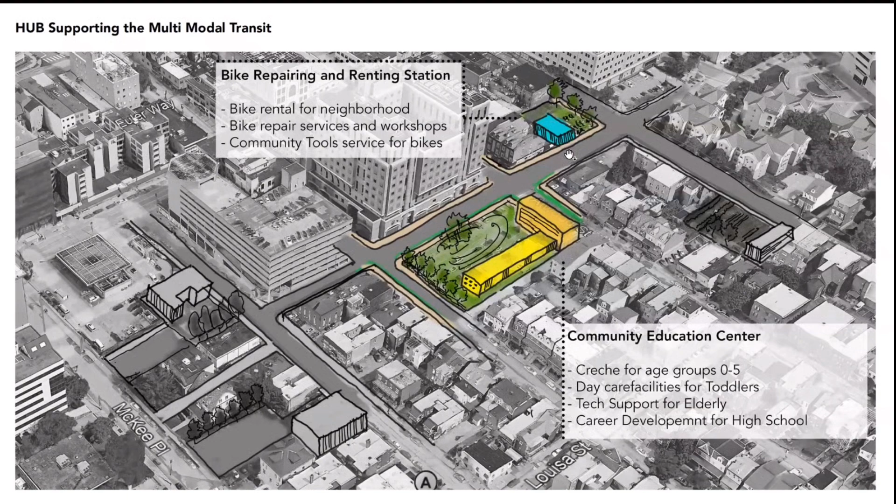As part of the 10-year goal, efforts to increase localization in business development will be launched. The business district on Forbes Avenue, as well as the local business district of Central Oakland on Atwood Street, will be supported by intensified marketing and monthly street markets.

Also, a sustainability resource center will be initiated in collaboration with CMU and Pitt, and educational programs within the Oakland Avenue Farm will encourage community engagement.

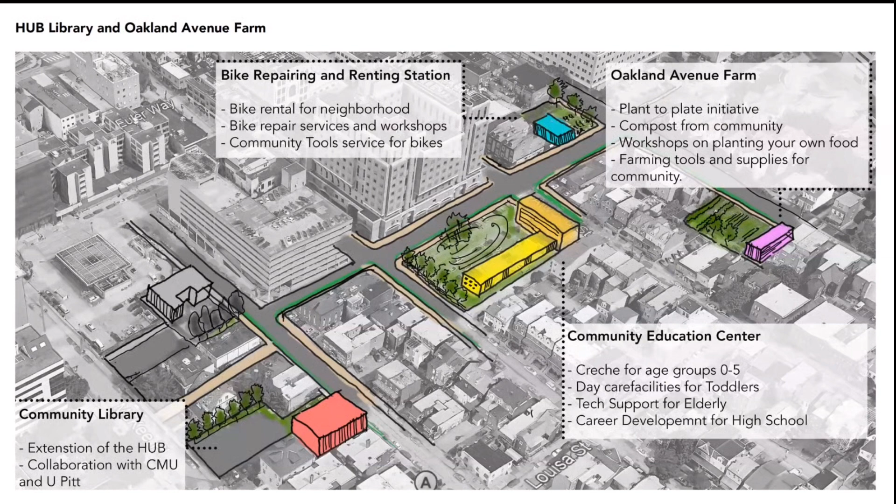In the 4th phase, at the 20-year planning horizon, the Community Education Center is a fully operational facility that has enabled Central Oakland residents to find better employment and enrich their lives.

Local initiatives have led to hillside remediation. A fund for the maintenance of city steps is in place. OPDC's expanded role in the neighborhood, and its partnership with People's Oakland, has produced a foster home for the children and the elderly.

The new facility provides not only a variety of learning spaces inside, but outdoor open spaces, as well as functions at different levels to serve the community.

As we can see, the central building of the Educational Hub is supported by various allied activities that have come as a result of the talent asset map of the neighborhood.

We can see that we are looking at a bike renting and training station that can help the community increase, and decrease single car usage, at least within the neighborhood. And Oakland Avenue Farm, which is a program that is already in place along with the Pitt students, is expanded to the community.

It is increased in terms of its scale, with functions like a tool bank or a food bank or a training center with training workshops, where it teaches people in the community to grow their own plants.

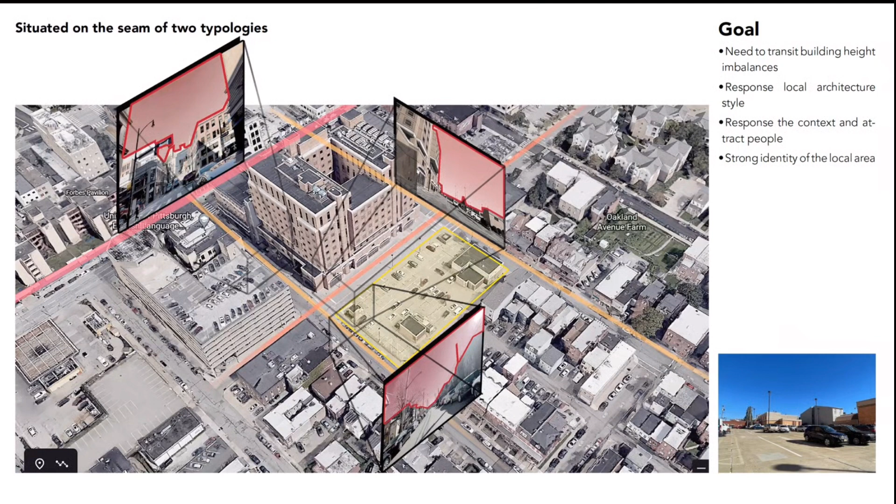The parking lot is very well connected on all three sides, making it a perfect place for a community service hub, wherein you want more and more people to interact with it and have a seamless relationship with the context.

As a precedence, a space with multiple levels of outdoor and indoor open spaces that are flexible in terms of functions is looked at, which we have tried to replicate in our physical form of the building.

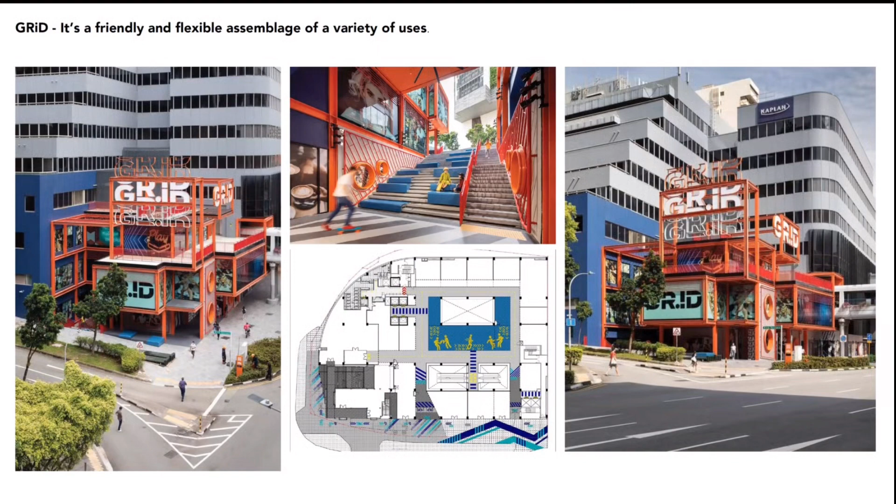The new facility provides not only a variety of learning spaces inside, but also outdoor spaces at different levels. The facilities include cafe, retail, and restaurants that can line along the commercial street, giving them an opportunity to promote their businesses. Children's play areas, roof gardens, and gardens at different levels are designed for hosting different activities for children and the elderly.

It also hosts administrative functions like offices, classrooms, and larger halls to conduct workshops and seminars for all the activities and allied activities going on in the hub.

The plaza is lined along Semple Street, and it serves as a large, welcoming, open space to all the users in the community, giving it a sense that the space belongs to them, the community, the people.

The programs in the buildings are such that they attract people of all age groups for learning activities during weekdays, evenings, and the weekends.

We can clearly see that the form of the building steps down towards the residential fabric, whereas an interactive and engaging facade lines along the commercial edge. This forms a well-connected transition between both typologies of fabric that it is trying to stitch together.

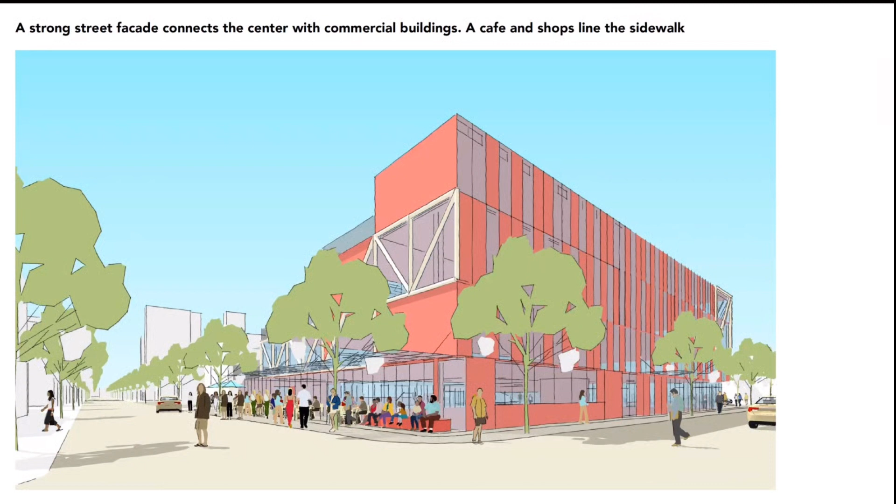The success of the community education center will be assessed in terms of residential engagement, how many local businesses we can employ, and how we can improve their vitality in the neighborhood. How can we improve the neighborhood's social connections? How are we improving community and household self-reliance? And overall, how are we improving the neighborhood's livability while taking care of its physical environment and the sense of place that Central Oakland already offers.

So this was our proposal for the Community Education Center that aims at increasing the vitality, social connections, self-reliance, and livability of the neighborhood of Central Oakland. Thank you.

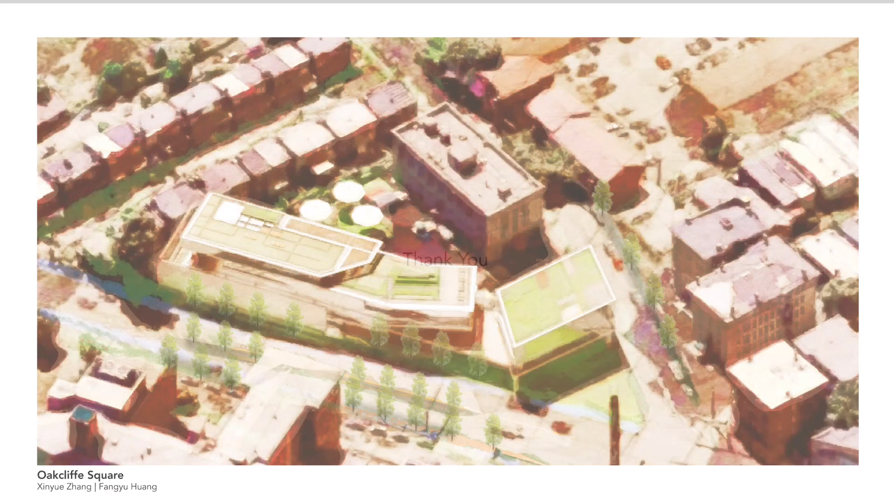The Oakcliffe neighborhood is located in the west part of South Oakland. The advantages that make Oakcliffe a good community today are the proximity to institutions, the nearby tree-covered hillsides, diverse housing, and good access from the Boulevard of the Allies.

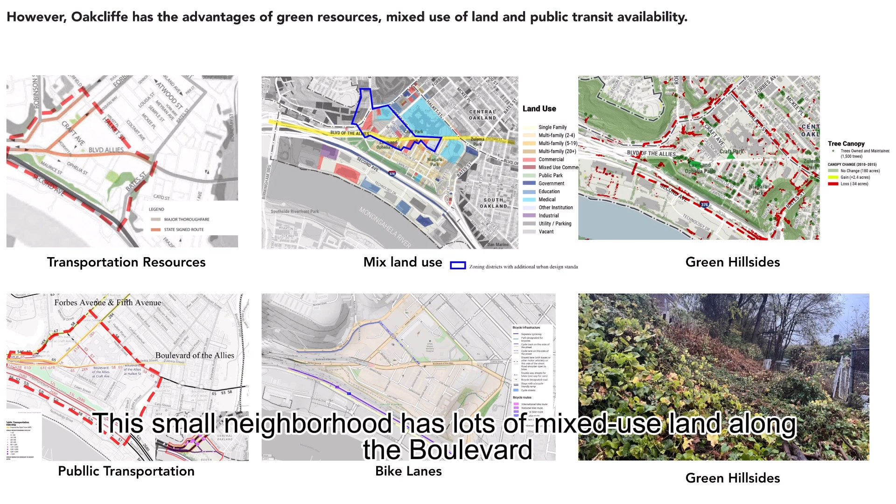The Boulevard, one of Oakland's major traffic arteries, and bus lines pass through Oakcliffe. This small neighborhood has lots of mixed-use land along the boulevard. It also has several community-serving organizations.

Oakcliffe currently has some weaknesses. Its average education level is lower than in Oakland as a whole. Home ownership rates are low. Its visible face along the boulevard is more of a back than a front. The entry points into the community are poorly defined. There is no usable green space and few street trees. Dangerous traffic conditions on the boulevard cut Oakcliffe off from the Oakland amenities.

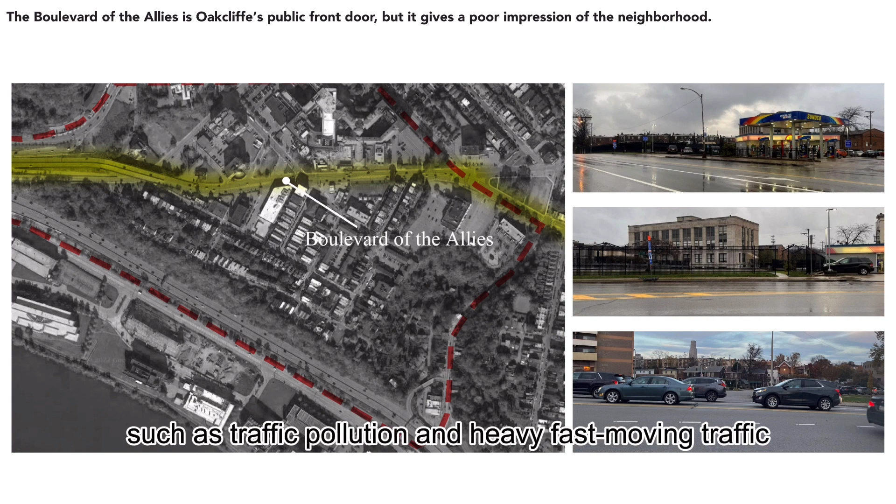While the boulevard is the main gateway to the community, its negative impacts, such as traffic pollution and heavy fast-moving traffic, need to be mitigated.

The Oakland Plan proposed locating a hub in the Community Human Service building on Lawn Street. We have selected a new, larger, and more visible site instead, the Golf Research Building, which is near the center of a 15-minute walking circle. Since it is currently owned by UPMC, we will be leasing it for the first 2 years.

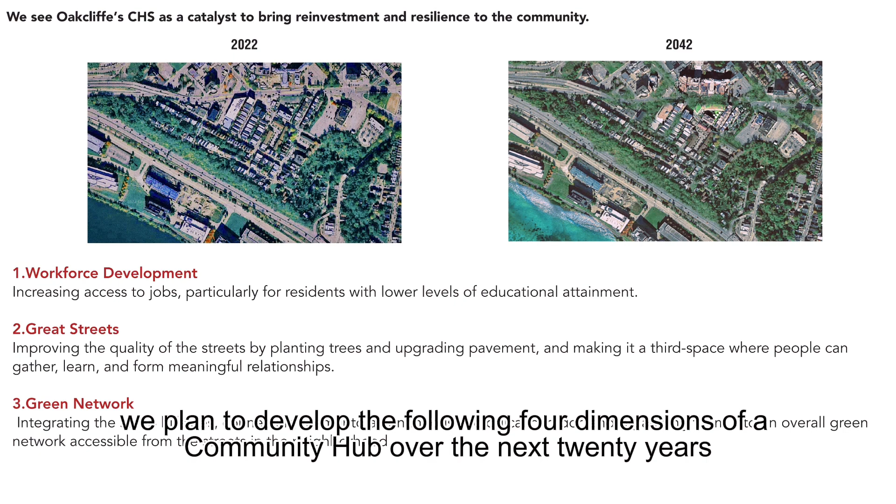In our vision, we plan to develop four dimensions of a community hub over the next 20 years. First, for workforce development, the hub will provide skill training with internships at leading local institutions and organizations, and will promote local economic vitality by incubating local jobs.

Second, our strategy will create great street environments that promote local place attachment and a sense of intimacy in the neighborhood. A program of tree planting and stewardship over 20 years will temper the neighborhood climate and improve property values. Additional public improvements include installing crosswalks and upgrading street paving.

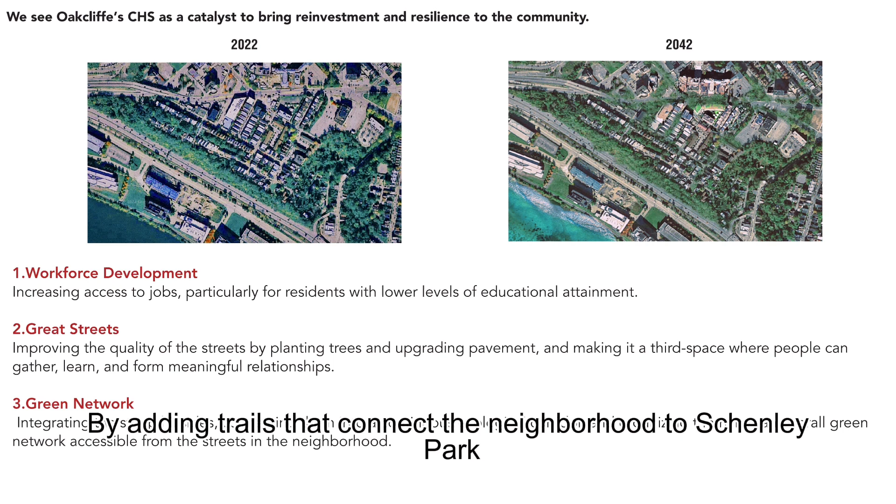Third, we propose to improve the hillside with trails that connect it to Oakland's larger green network. By adding trails that connect the neighborhood to Schenley Park, and by improving the neighborhood streets, residents will be able to enjoy the health and recreation benefits of an overall green network.

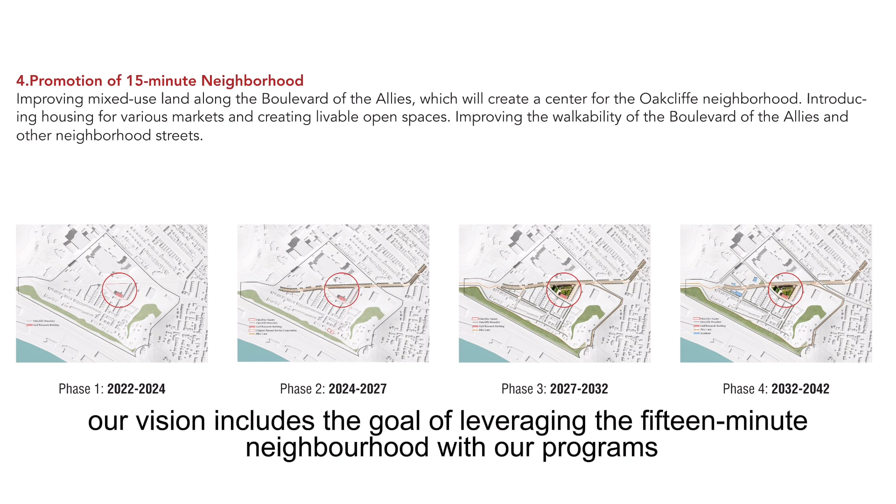Our vision also includes the goal of leveraging the 15-minute neighborhood with our programs. It facilitates local access to mixed land use along the Boulevard of the Allies through the creation of Oakcliffe Square, a development that includes a community service hub, a cafe, shops, a child care center, a business incubator, and affordable high-quality housing.

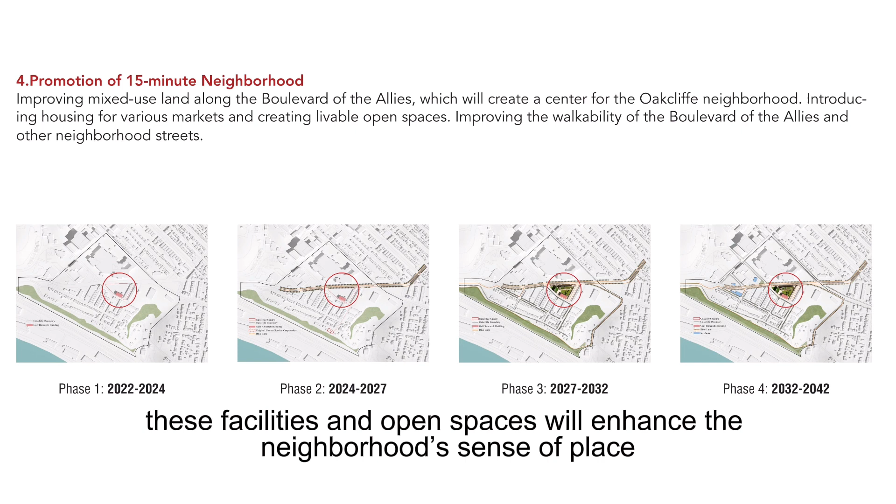These facilities and open spaces will enhance the neighborhood's sense of place. Along with better pedestrian-friendly streets, they improve walkability and connectivity throughout the community.

The initial community service hub will serve as a catalyst to enhance the reinvestment and resilience of the entire community over the next 20 years.

The first 2 years, beginning in 2022, are the program's first phase. The map on the left indicates where our CSH is located in the Oakcliffe community. We will lease the golf building to allow time to negotiate with UPMC on purchasing the property.

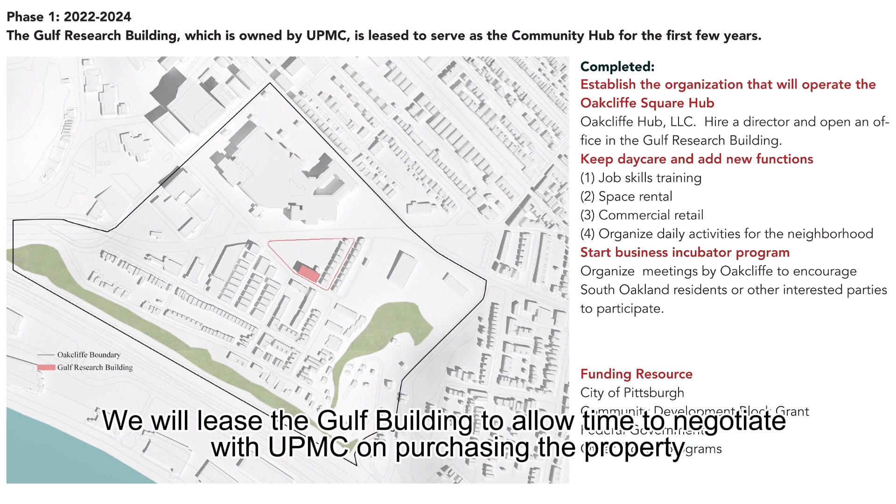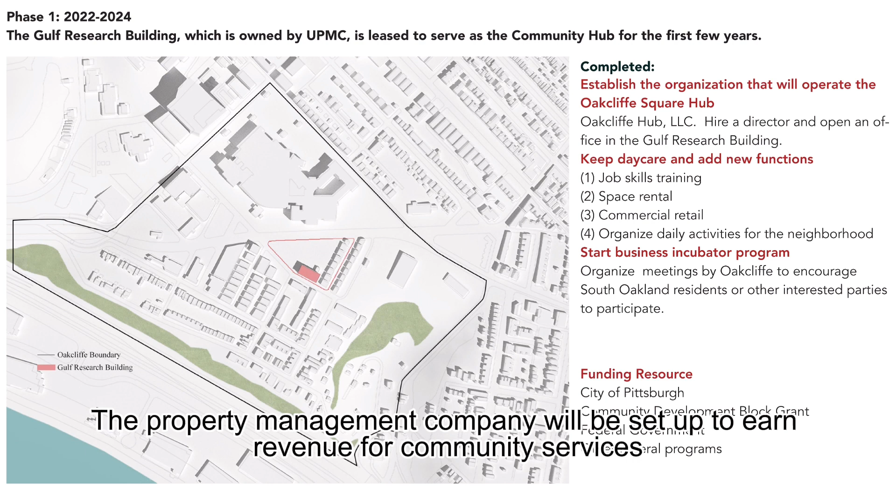First, a community management corporation will be founded, responsible for developing the property and organizing the delivery of community services. We will continue daycare services by reusing existing facilities in the building to serve both residents and local employees. We will also provide job skills training services, organize daily community activities, and open a coffee shop and thrift store. The property management company will be set up to earn revenue for community services.

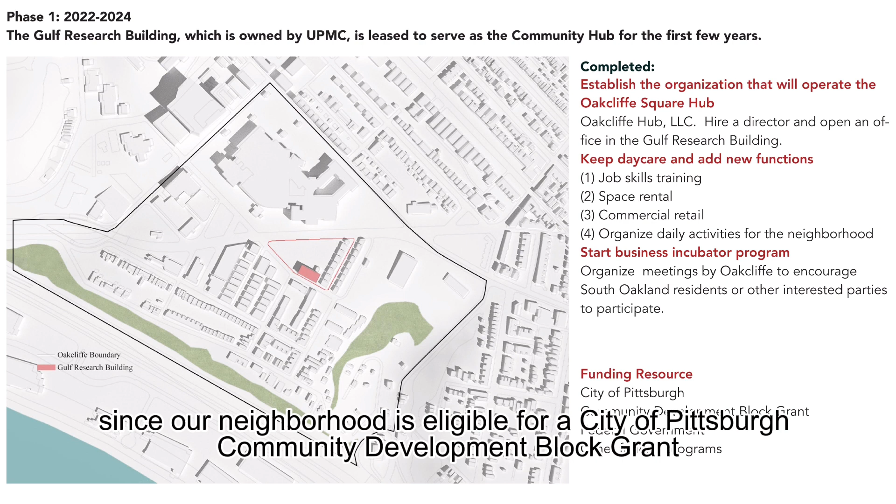During this phase, our primary funding sources are OPDC, the City of Pittsburgh, the federal government, and other federal programs. Since our neighborhood is eligible for a City of Pittsburgh Community Development Block Grant, we will apply for funding for our staff. Our annual budget for the 2 years, listed later, describes in detail how our program sustains itself financially.

The Community Management Corporation will develop a greening strategy in 2023 to make the Gulf Research Building carbon neutral in 5 years, along with a 5-year plan for new development along Boulevard of the Allies by 2024. Oakcliffe Square should be able to provide at least 50 direct jobs and good new workplaces in the community.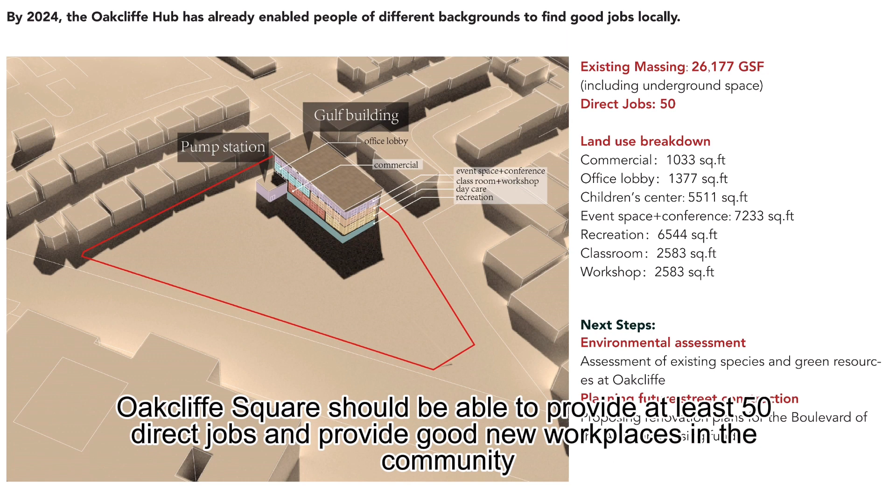The diagram on the left shows five specific types of services and where they are located in the building. The text on the right shows the details of the site or location for each use.

The main scope of business of a community development corporation can basically be divided into two parts: real estate development and the provision of community services. On the left is the organizational chart of Oakcliffe Square Community Development Company, which has an elected board of directors whose responsibilities are primarily to guide and develop plans to bring about the community's vision.

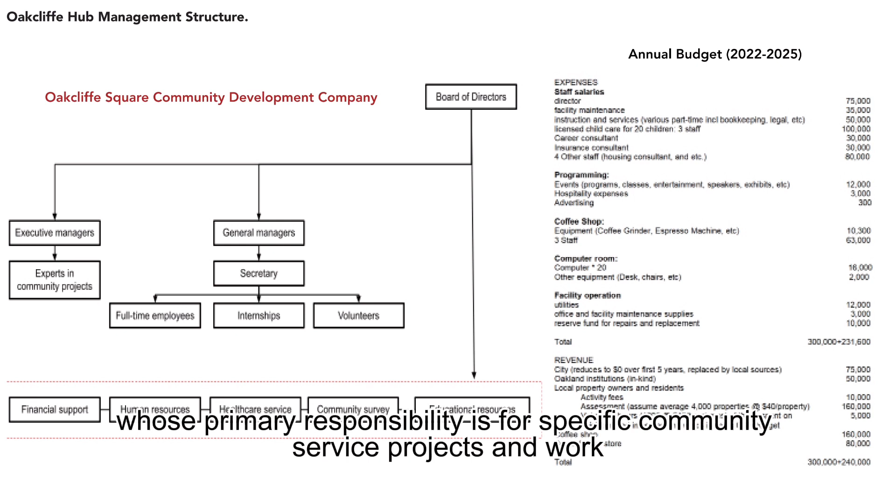The second tier is comprised of management staff. The final tier is program staff and volunteers, whose responsibilities are primarily for specific community service projects and work.

On the right is the annual budget, which shows how we propose to make the project financially viable. We make a profit primarily through office rentals, daycare, food, and thrift stores.

We understand that during the next 5 years, Community Human Services may leave Oakcliffe, so at that time, the hub will take over these functions.

The second phase will begin in 2024, during which the corporation will focus on improving the Boulevard of the Allies.

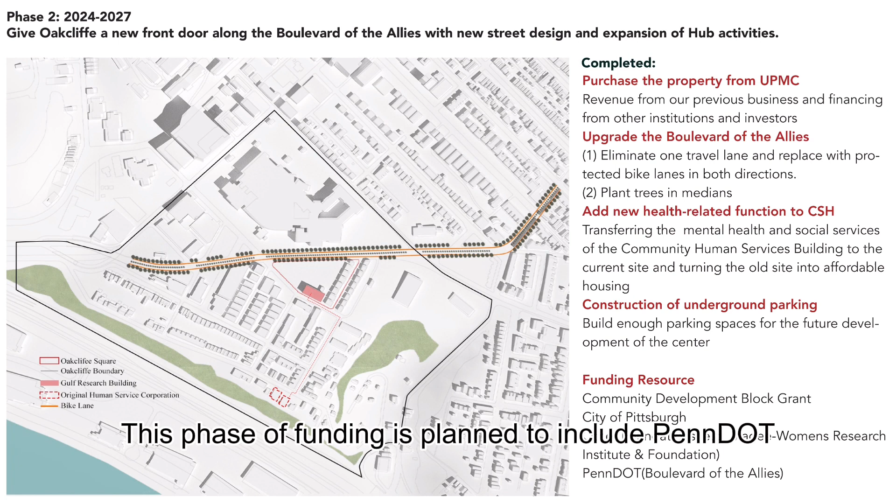This phase of funding is planned to include PennDOT, a key stakeholder. In addition, we will use the profits from the previous phase and our funds to purchase the Gulf building during this phase. In this phase, the Community Development Corporation will begin planning Oakcliffe Square development.

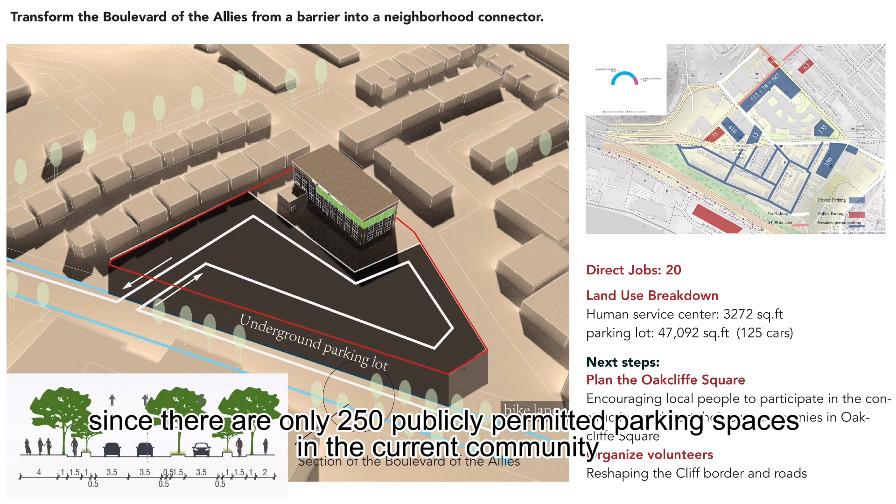They will submit a proposal to the Planning Commission at the outset for rezoning that is needed for an integrated mixed-use center. They will investigate the need for additional parking, since there are only 250 publicly permitted parking spaces in the community currently, as illustrated by the chart in the upper right corner.

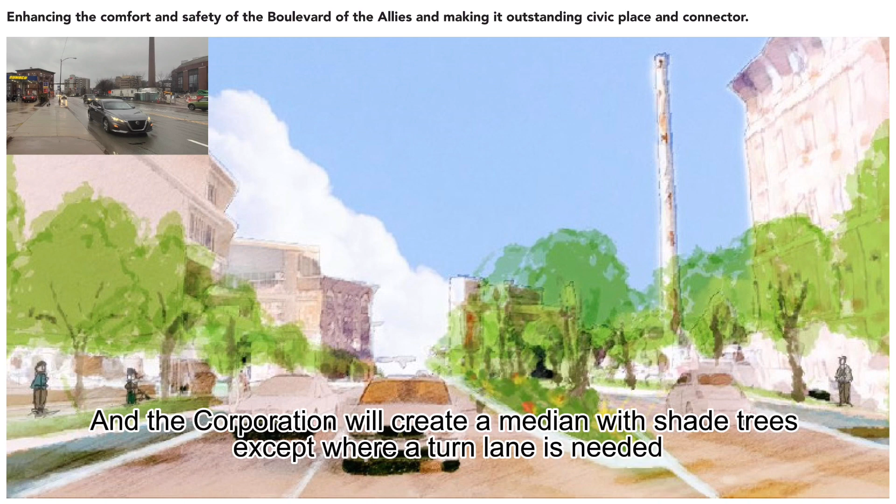During this phase, the city will upgrade the boulevard by upgrading paving on both sides, planting trees, and replacing one east-to-west vehicular lane with 2 single bike lanes, one on either side. And the corporation will create a median with shade trees except where a turn lane is needed. This new street design will extend through Oakland into Schenley Park.

In the third phase, the construction of Oakcliffe Square is expected to be completed. It will be a significant local business incubator that provides a wide range of employment, affordable housing, cafe, childcare, counseling, and community services. In 2030, a cycling loop will be built to construct trails along the cliffs.

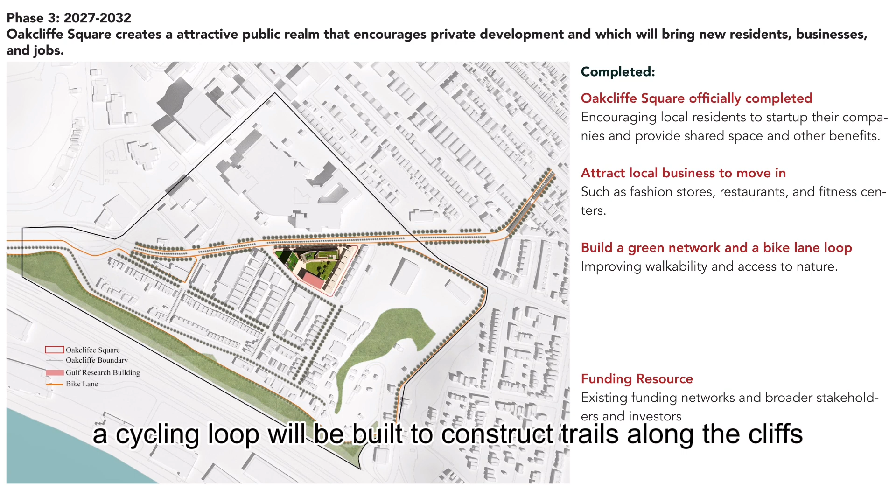In the years since 2023, a substantial number of trees have already been planted and are over 20 feet tall. The image on the left shows the various components of Oakcliffe Square, except for the underground parking.

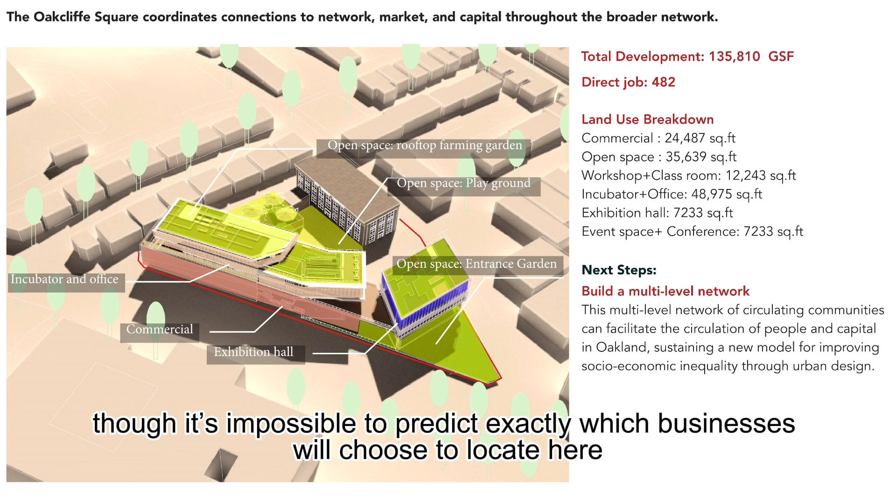One notable feature among this is its plan to provide a significant amount of green space and semi-open third places to improve its residents' well-being, promote the place's intimacy, and provide mixed land use. As the figures on the right indicate, different land uses are anticipated, though it's impossible to predict exactly which businesses will choose to locate here.

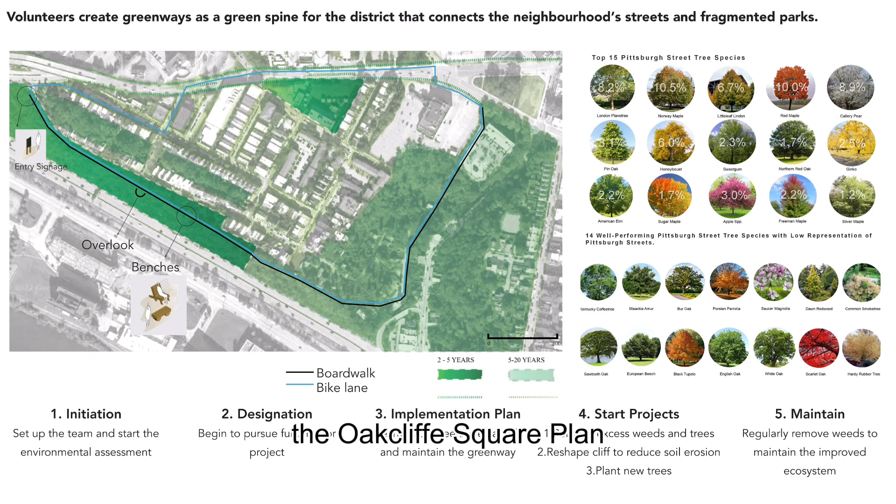This is our overlook deck, built on the edge of the hillside. During our site visits, we found a section of the cliff with such great views that we wanted to develop it like the Pittsburgh Overlook.

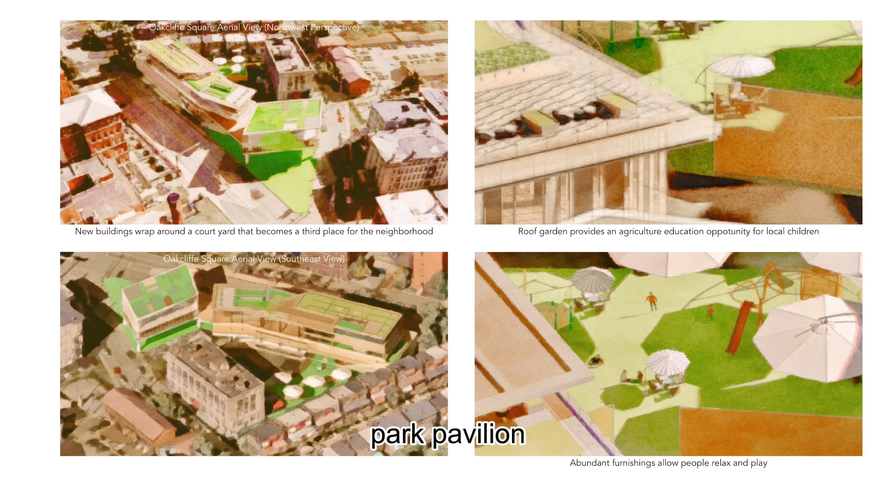Neighborhood volunteers plant and care for trees in residential areas within the community to improve the quality of the neighborhood streets. Creating third places for the community, such as the cafe, park pavilion, and rooftop gardens, enhances the community's sense of place. Rooftop agriculture programs promote sustainable living and community engagement through food, education, and celebration.

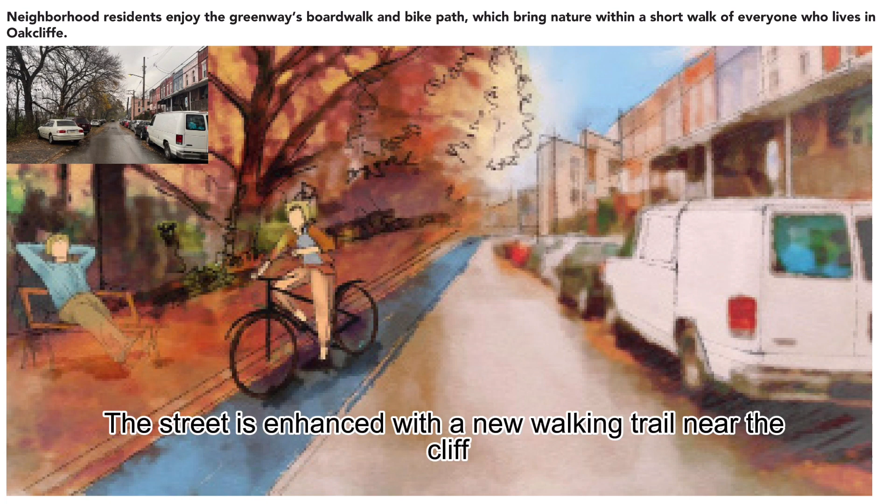This image shows the renovation of the residential area adjacent to the cliff. The street is enhanced with a new walking trail near the cliff, a bike lane, and an overlook.

In the fourth phase, nearly 2 decades later, the Community Development Corporation will progressively complete the renewal of the existing commercial properties along the boulevard, providing space for more local businesses and a better front door for the neighborhood. Furthermore, during this phase, the green network with a bike loop is almost complete.

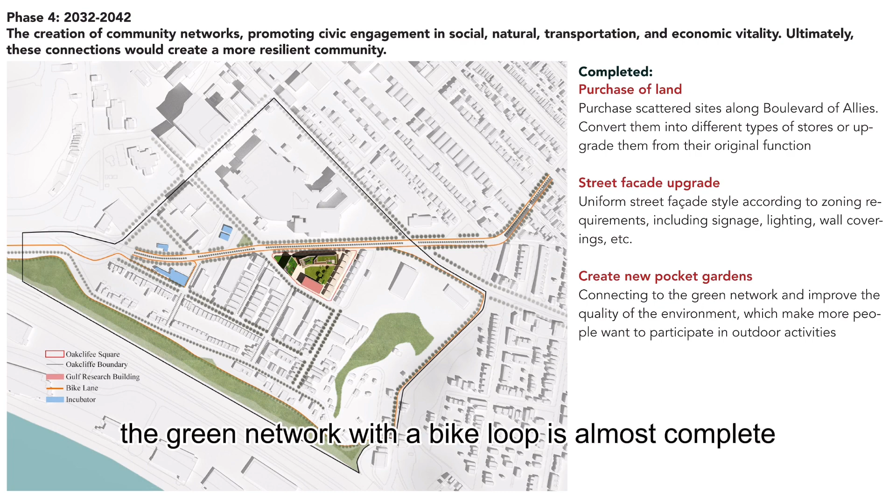We are committed to delivering on the commitments in our vision, creating over 800 jobs through 4 phases and new sustainable local businesses in the community. Moreover, the revitalization has improved the quality of the environment and the connectivity within the community, and makes it a model of a 15-minute neighborhood.

A collaborative circle will be created between institutions and organizations, residents, and CSH, based on 2 decades of workforce training efforts, along with the regeneration of existing commercial properties along the boulevard that will be completed by the Community Development Corporation over the last decade. More well-run local businesses will be active in the community as leading agents of the neighborhood through the incubator.

In 4 distinct phases, the project benefits from a strong local engagement and feedback loop in each phase. This means that in 20 years, no matter what happens in our community, what people come or go, Oakcliffe will be able to evolve adaptively and resiliently.